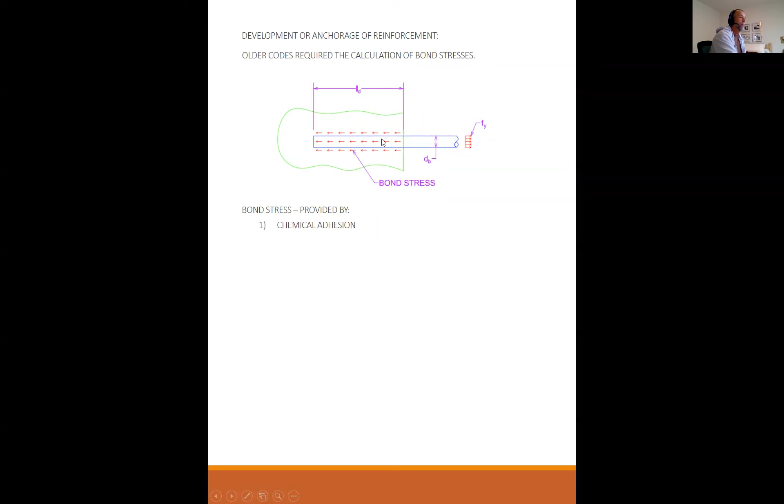The older codes checked this by calculating what the actual bond stress was at the interface between the steel and the concrete. We don't do that anymore. The bond stress is provided by, well, there really is a bond stress, we're just not going to try to calculate it anymore. It's just not reliable, but there is an actual bond stress. So what keeps this rebar from just pulling out of the concrete, so to speak? The bond stress is provided by these actions.

The first action is chemical adhesion. There's actually a chemical reaction between the concrete, the cement really, and the face of the steel that is sticky, and they bond to each other. If you've ever poured concrete up against steel, you know it takes a little banging to knock the concrete off. If there's any oil or form release on it, that makes it a lot easier, but concrete will stick to steel. If you've ever witnessed somebody leaving concrete in a mixing truck without cleaning it out, you actually have to get a guy inside with a jackhammer to knock all that concrete off.

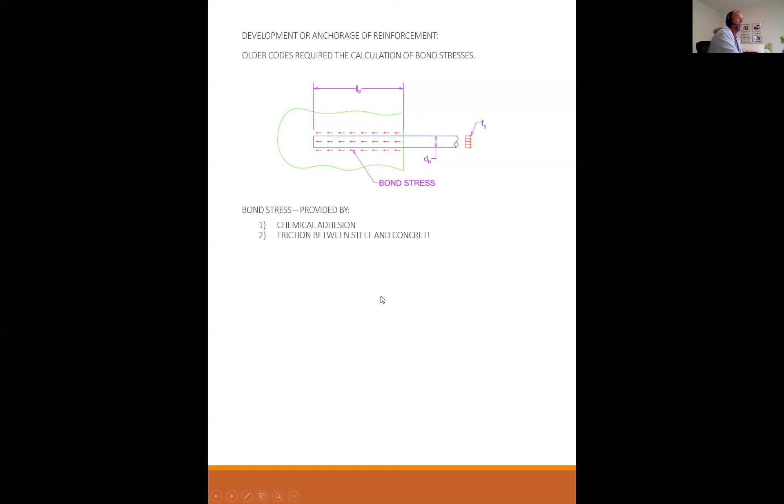It really does stick. You also get friction between the steel and the concrete, so as the steel is trying to pull out, there's friction between them. And lastly, you get bearing on the deformations. All rebar nowadays has little ribs on it. Those ribs are encased in concrete, and you'd actually have to crush the concrete between the ribs in order for the rebar to pull out. So these three actions are what lock that rebar into the concrete.

Bond stress is no longer computed because the test used to evaluate allowable bond stress put the surrounding concrete in compression. In a beam, the concrete surrounding the tension steel is not in compression. In other words, they used to hook up an apparatus, put a rebar in a chunk of concrete, put a testing ram on it, and pull to see how much development length it took to get it up to its yield strength. But the problem was they would lock the whole system together so the concrete was confined and couldn't split or crack. So it wasn't really a fair, true test, because in a real beam, the concrete can do whatever it wants, it can split and crack.

So instead of doing this, current practice is to focus on the development length, L sub D, instead of bond stress. Providing adequate development length ensures that F sub Y can be developed in the rebar without pull-out or splitting of the concrete. That's what the code is geared toward today: you plug in some parameters and it spits out what L sub D needs to be. Then it's our job to make sure that wherever the critical section is, the rebar extends at least L sub D beyond that critical section.

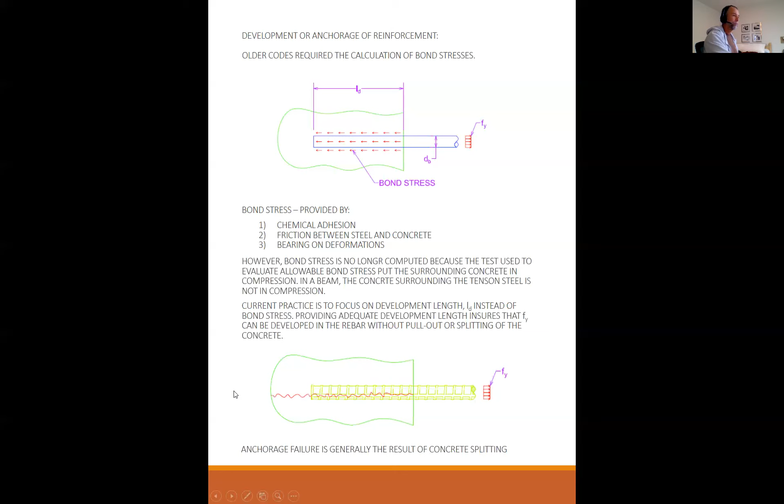Okay, so we have types of bond failures. What this is illustrating is around each one of these rebars is a cylinder of concrete. I mean, it's all concrete, but you can picture it like there's a cylinder of concrete surrounding this rebar, and that cylinder of concrete is in tension across the face of it because the rebar is trying to pry that concrete apart, so to speak.

So in a beam, if you have all these rebars trying to develop at the same time, it could actually split the beam right down through the center here. And once it splits that beam, you lose development on these rebars.

So we have this factor, C sub B, and C sub B is defined as 1/2 of the spacing to the nearest bar, less than the distance to the side or bottom face. So if I'm trying to develop this bar right here, then C sub B is the distance to the nearest face from the center of the bar, or 1/2 the space to the next bar.

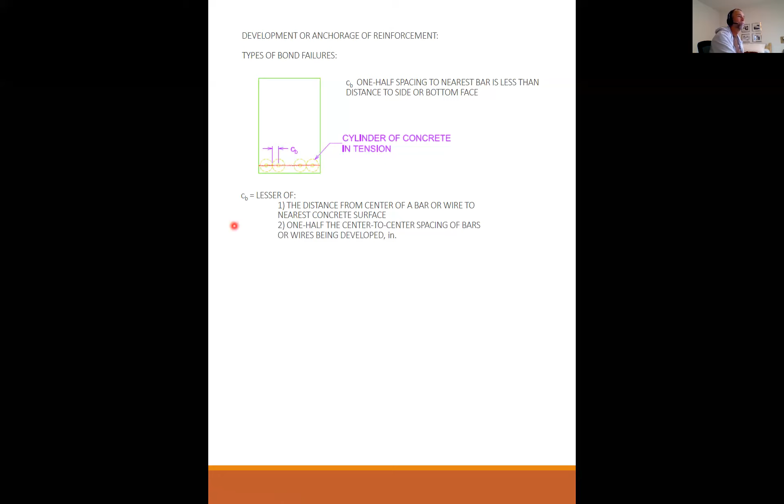Okay, so here we got bars on the corner. C sub B is measured from the center of the bar to the outside face or to the bottom face, whichever is the least.

C sub B: distance to the side face, less than the distance to the bottom, or 1/2 the spacing to the nearest bar. So this is really showing that if you have a concrete beam and you're developing these rebars, one of the failure modes could be that this rebar develops cracks going to the side or to the bottom or both. And once this cracks, it can widen that crack and separate a little bit.

And then you lose the chemical adhesion, you lose the friction. And at some point, you'll actually lose the bearing on the ribs of the rebar. And so you could prematurely fail a beam at a lower strength than you thought you would because you didn't consider this bond.

Actually, if you guys want, I will divulge an insider secret here. You can tell me if this helps or not, but okay.

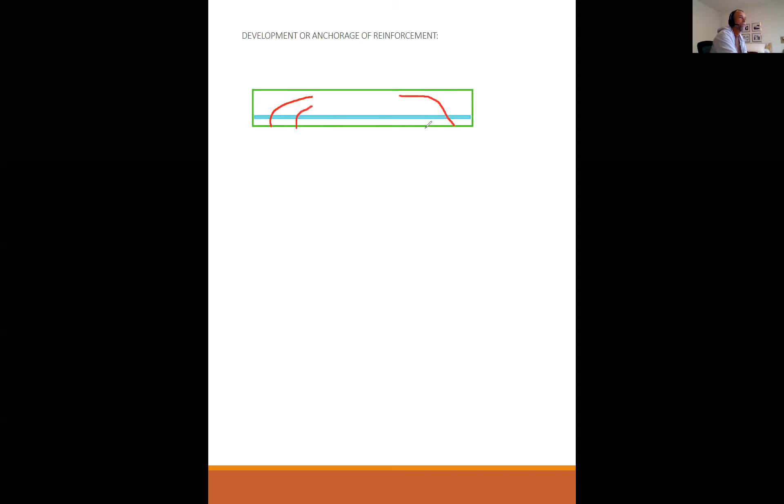Won't make this terribly long, but when I tested the beam with the number 5s, as I was testing them, I started getting some cracks that looked like this. And I was starting to get a little nervous. I was like, oh, look at that. Well, they're shear cracks. But I had number 3 ties in there, so I wasn't too terribly worried about shear cracks. That was part of my design.

But then, as I'm testing, and we're getting closer and closer to what the ultimate load should have been, the load that crushes the concrete here and yields the rebar here, we're getting closer and closer until I saw these cracks that went right like this, here and here. And no sooner did I see those cracks, the whole thing just collapsed. It instantly crushed up here, and these big wide cracks appeared here and here, and my beam failed.

I mean, literally, it was just 2 pieces of beam sitting on the bench. And it didn't get the final strength. I did not achieve the ultimate strength that this beam was supposed to achieve. Anybody want to take a guess why?

Was your placement of steel incorrect?

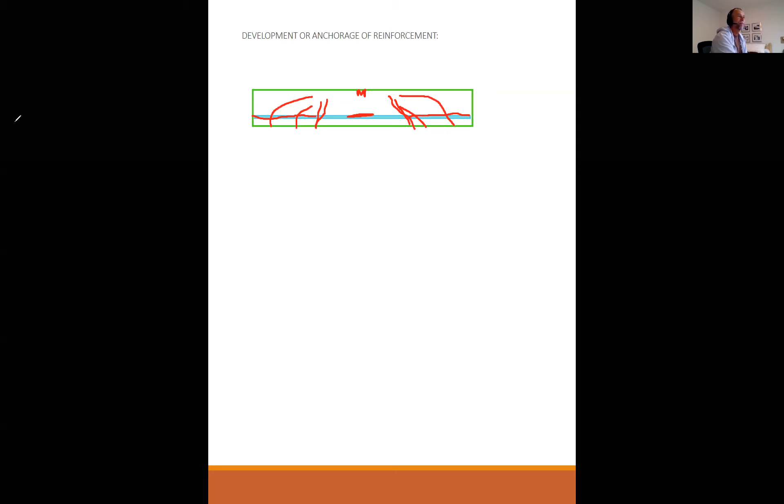I was saying, did it not bond with the concrete, right? It did not bond with the concrete, right? That's exactly right. So the point of maximum moment is right there at the midspan, but it still had, say, right here, a very large moment.

So I was getting a flexural crack, kind of like that. And it was still a very large moment. The problem was, which is why I brought up the story, the distance from the end of the rebar to this point of very large moment, not the maximum moment, but a very large moment, was insufficient. The whole beam was only 5 feet long. So that means from the midspan to here is 2.5 feet. That means this distance here was less than 2 feet, maybe 18 inches, 20 inches, something like that.

And when the stress in the rebar overcame the development ability of the concrete behind the rebar, it split right here and over here, and we had a bond failure. So the rebar never yielded. It got close. I back calculated to see what it was. I think I got something like 50-something KSI. So it got close, but it never developed the yield. So it failed in bond.

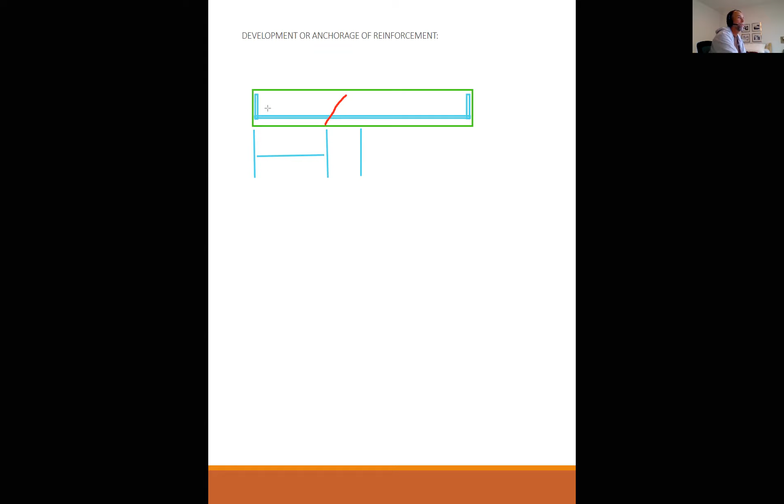And if I was to do this beam again, what I would do is put little tails on it like this. Because this distance was so small, it was insufficient to develop that bar to the point where I could develop the yield over here. So if I had put little hooks on it like this, then these hooks would grab the concrete better and I would have not had a bond failure.

So that was just a little story down nostalgic avenue about, yeah, this really happens. You really do have to think about this, because that would have been a catastrophic failure if this was actually something in service.

Professor, but isn't how the concrete's poured with the rebar, isn't that the construction engineer's job, not the one who's designing it?

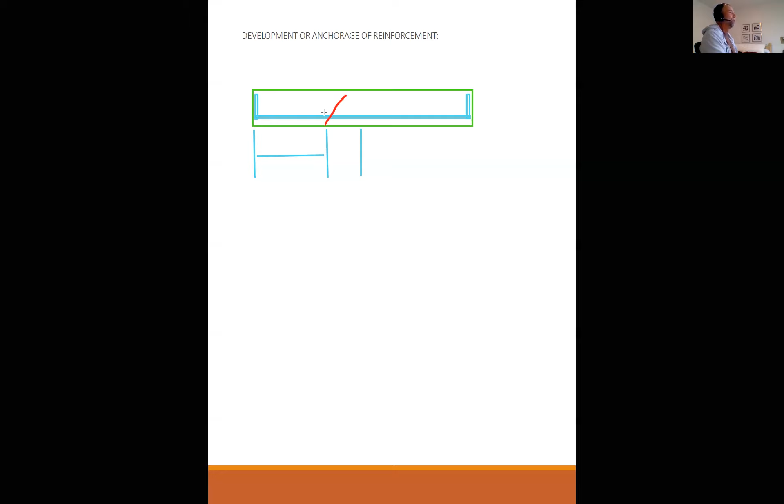No, it's not, but that's a good question. The design documents would show the beam like this. If I didn't show these tails on it, different people work with the contractor to draw up rebar shop drawings for different phases of construction. But if I don't show these hooks, the person drawing the rebar would just put a straight piece of rebar in there, so the concrete subcontractor wouldn't put these hooks in because that's what the design document shows. So if I want hooks on this, I have to draw hooks on it or call that out on the structural details.

Does that make sense? Yeah, but the hooks—you said they're only used if it's a short span, right? If it's short, or does it go for longer beams and girders too?

Well, let's get through this lecture—hopefully I'll answer that, because it's kind of a complicated thing. But suffice it to say that...

If your critical section—a critical section is just a section where, right here on this plane, I need to develop the yield of the rebar. That's all it means. This is just an arbitrary location on the beam, saying that right there where that red line is, I want that rebar to be able to develop its yield strength.

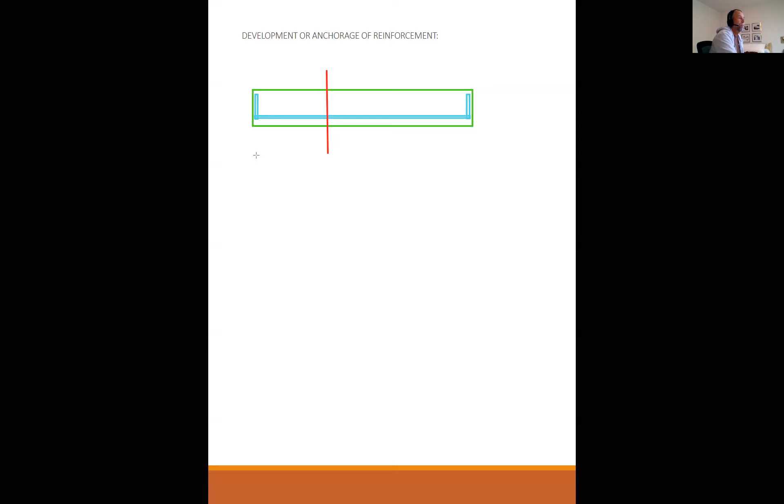If that's my critical section, it's my job as the engineer to be sure that on both sides of it, the rebar is fully developed. If it's not, I need to do something to make it fully developed. Hooks is one option, headed rebar is another, and even going with smaller bars is another option because they develop faster than big bars do. That's on me—the structural engineer is responsible to be sure the rebar is properly detailed at all locations within the scope of what you designed.

Makes sense, thank you. Okay.

All right, was nobody curious what happened to the fiberglass reinforced plastic? Did it fail before the rebar? Yeah, it did. Yeah, it was kind of obvious.

What about the bamboo? How did that do? Bamboo did really well. It did not carry the same load as the steel—the steel took something like 28,000 pounds to fail the beam, even though it was supposed to take over 30,000. I think the bamboo took like 18,000, but that's still pretty remarkable for bamboo. And it was very ductile—it developed cracks and failed slowly and deflected. It was really not a bad option.

The fiberglass reinforced plastic, on the other hand—the misconception I had as a student was that since this stuff doesn't yield until 120 to 140 KSI, it must be twice as strong. But what they don't tell you is that even though it may eventually be twice as strong, the modulus of elasticity of the material is only a third of what it is with steel. So as you're trying to develop this immense tensile capacity, it's straining like crazy—it's like reinforcing concrete with rubber bands. The concrete just cracked wide open and ultimately failed due to strain failure because the material kept stretching and stretching. It never got anywhere near 120 KSI. I back-calculated that the material was somewhere in the 30 to 40 KSI range when the concrete crushed. I was very disappointed.

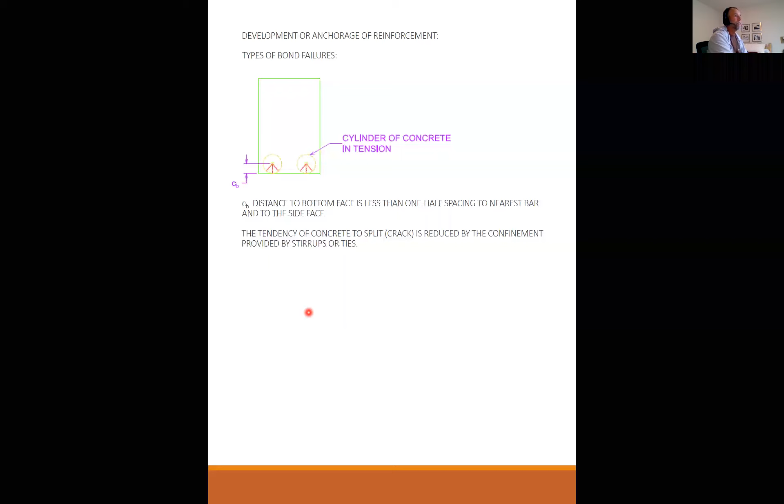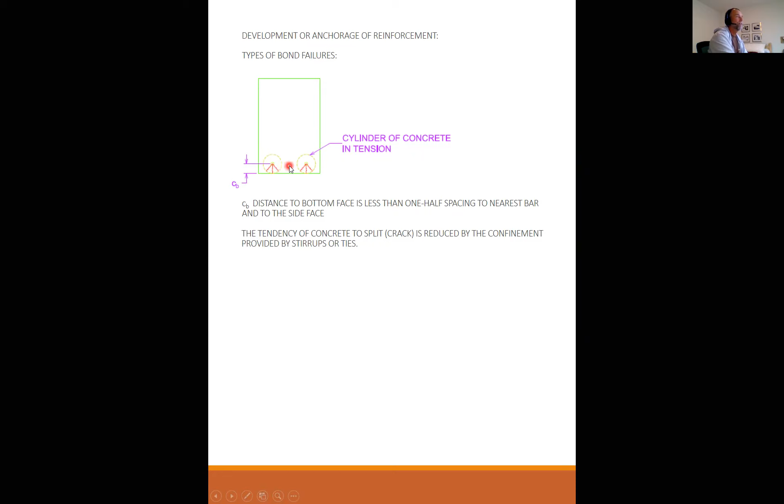So that's where we're transitioning to the next section. If it wants to crack along these faces, having a steel tie that wraps around this thing will tend to keep those cracks from developing. It'll still crack, but it'll keep them from opening up. So having ties around the steel you're trying to develop helps develop that steel. Here's the cracking plane from these rebars trying to develop, and this leg—we have two legs of steel crossing that plane.

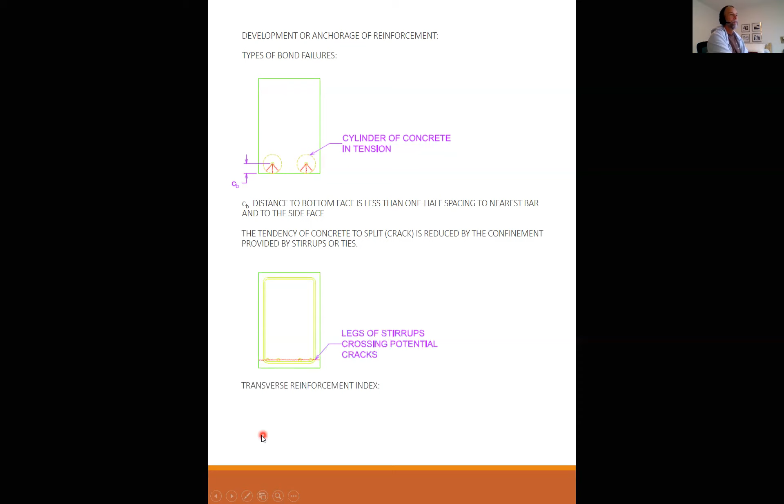So then we invent this thing called a transverse reinforcement index. Per ACI 318, section 25.4.2.3, we have the transverse reinforcing index, which is KTR, equal to 40 times the area of the transverse reinforcement

over S times N. This is not Saturday Night Live, this is not SN, this is S times N, where A sub TR is the total area of transverse steel. For U-bars and ties with 2 legs, use 2 times the area of the tie. S is the spacing in inches of the transverse steel, and N is the number of bars on the plane of splitting. If the main steel is in more than 1 layer, then N is the number of bars in 1 layer.

KTR may be taken as equal to 0 for simplicity if you like. It's certainly conservative. So there's a limit on the effect of spacing in transverse steel.

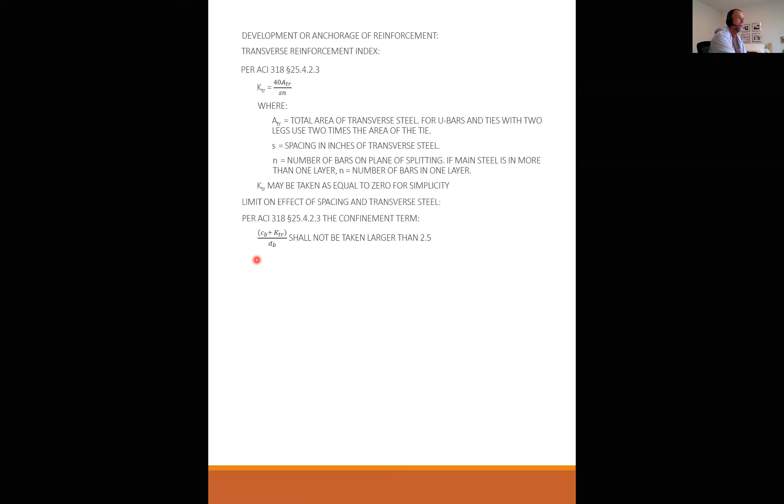Per ACI 318, section 25.4.2.3, the confinement term CB plus K sub TR over DB shall not be taken larger than 2.5. You'll see where this fits in a second, but the effect of the ties helping the development is limited. It kind of peters out after a while.

Okay, so now the development length per ACI 318, section 25.4.2.3. Here's the equation. So L sub D, the length required to develop the yield of the rebar, is equal to this whole thing here, where we have 3 over 40. We have Fy over lambda, remember our lightweight factor, times the square root of F prime C. We have these 3 modifiers, psi sub T, psi sub E, psi sub S.

We'll talk about those in a sec. And then here is your confinement term right down here. So you can calculate C sub B, you can calculate KTR over dB, but if this whole term is more than 2.5, then you're limited to just use 2.5. And then the last term here is D sub B, the actual diameter of the rebar that you're developing, which directly influences the length required.

Lambda is a lightweight factor from lecture 1, varies from 0.75 to 0.85 if you're lightweight, of course equals 1 if you're normal weight concrete.

Psi sub T is a casting position factor. It is equal to 1.3 if you have more than 12 inches of fresh concrete poured below the horizontal reinforcement. If your bars are vertical, this doesn't apply. But if you have horizontal bars, and when you're pouring the concrete, if there's more than 12 inches below the bar, then you have this 1.3 factor. Otherwise, it's equal to 1 for all other bars. And what is the point of this?

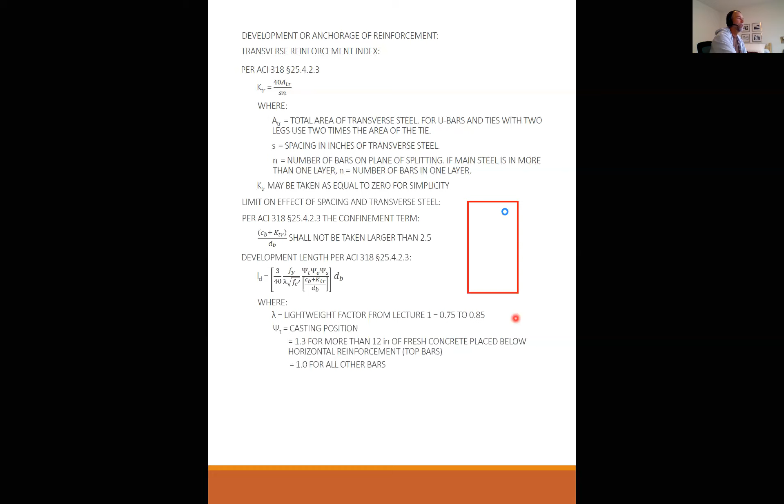Again, if your rebar is vertical, then this doesn't apply. This is only for horizontal bars.

Okay, psi sub E is for epoxy coated bars, where you have a factor of 1.5 for epoxy coated or zinc and epoxy dual-coated reinforcement with clear cover less than 3 dB or clear spacing less than 6 dB. It is equal to 1.2 if you have epoxy-coated or zinc and epoxy dual-coated reinforcement for all other conditions, and it's equal to 1 if you have uncoated or only zinc-coated reinforcement.

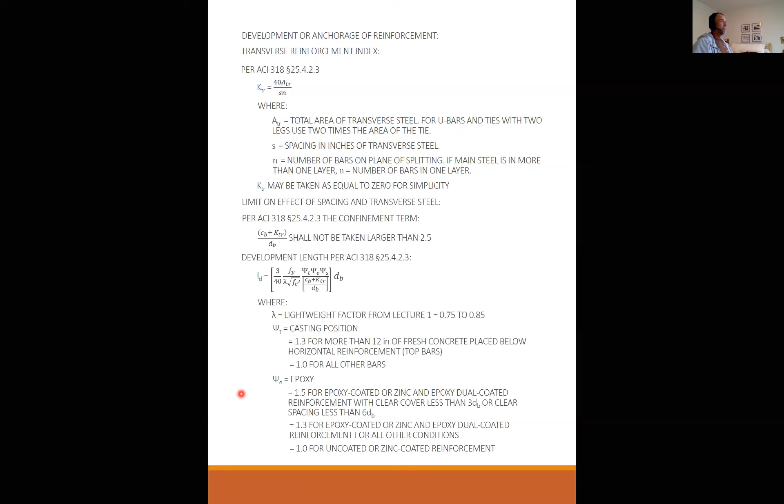So not very common will you run into epoxy-coated rebar. Let me put it this way. Not very common in my line of work means that I've seen it once. We did one job. In over 25 years, I've done one job where we had to provide epoxy-coated rebar.

Anybody want to guess where that one job, where that concrete was going? Was it submerged? Not quite. Good guess, though. Not quite submerged.

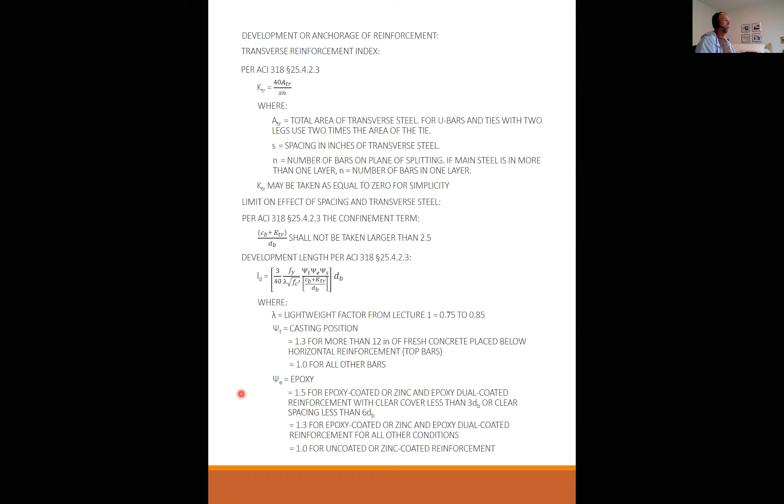It was actually a bridge that spanned from one side to the other side of a concrete containment vessel located at the Hyperion wastewater treatment plant. So this thing was inside of one of the poop ponds. And it was an environment that I don't think you even want to walk across that bridge, but it was a very caustic and corrosive environment. And Hyperion is LA County, so LA County Public Works made us put everything in that thing as epoxy coated. Otherwise, all the other thousands of jobs I've done were all uncoated rebar.

Okay, last one was psi sub S, which is a size factor. It's 1.0 for number 7 or larger bars, and 0.8 for number 6 and smaller bars and deformed wires. What they found is that bigger bars take more length to develop, and that's part of the dB factor in the equation, but it's kind of disproportionate. So they threw in this extra factor for bigger bars, and basically you get a little bit of a break for smaller bars.

So if you're having a problem with rebar development, one option is instead of, say, 3 number 11s, consider using 4 number 9s, or 5 or 6 number 8s. The smaller bar, you still get the same area because you use more bars, but they will develop faster than the bigger bars.

Per ACI section 25.4.1.4, the value of square root f prime c shall not exceed 100 psi. I've never really back calculated what that would need to be, but I think it's over 10,000... let's see, 10,000... oh okay, it is 10,000. So if you have concrete strengths over 10,000, you cannot use more than 100 psi for this term. They put a cap on it.

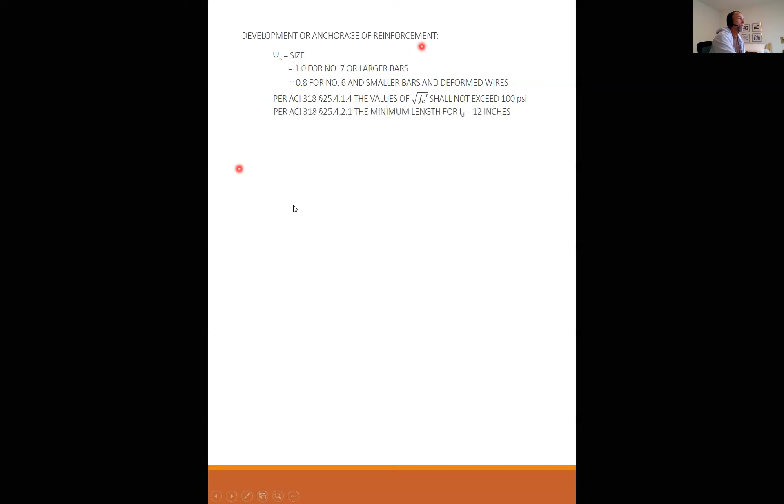Per ACI 318, section 25.4.2.1 - you can go to ACI chapter 25, and all of this stuff we're doing is in section 4. The minimum length for L sub D is 12 inches. So regardless of what the calcs say, you can't provide less than 12 inches. That's your minimum.

Okay, so example 1. If we're given 5,000 psi concrete, rebar is 60 ksi, and I have this cantilever situation where maybe this is a wall and I'm cantilevering this beam off of it. The question becomes, if I have 3 number 9s, how far back do I need to extend those number 9s into the concrete wall to be safe that when I load this, it will fully develop its yield before it yanks those bars right out of the wall? How far does that need to be?

Over here on the side, I've got some dimensional information. These bars are spaced at 7.5 inches apart, and they're 2.5 inches from the face, typical - that would be to the side or vertically. Concrete is normal weight, bars are uncoated. More than 12 inches of concrete will be poured below the bars - see, the bars are at the top here, so when they're pouring this, it's going to drop to the bottom more than 12 inches. So we do have a top bar situation. No transverse steel is provided in this case.

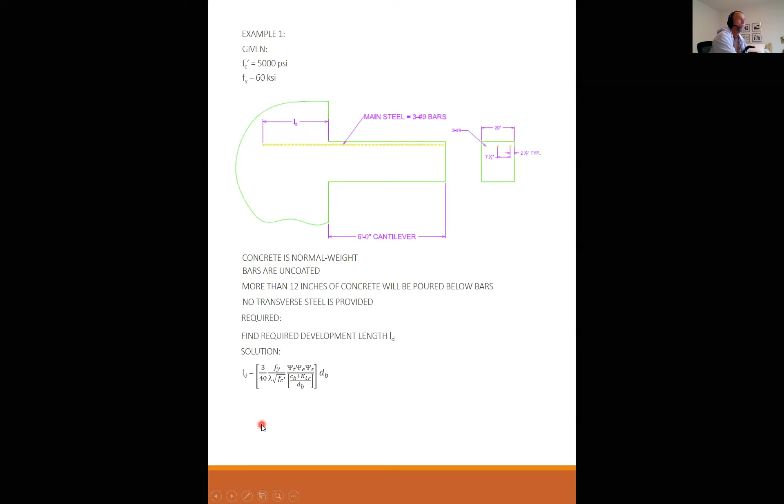Okay, so working through our solution, here's my equation. L sub D is equal to all of this, and I can start plugging in these values. Lambda is 1 for normal weight concrete. Psi sub T is 1.3 for top bars. Psi sub E is 1.0 for uncoated bars. Psi sub S is 1.0 for number 9 bars. C sub B is the smaller of half the spacing of the rebar, so 7.5 over 2 equals 3 3/4, or center of bar to the nearest face is 2.5 - 2.5 is going to control. K sub TR we're going to assume is equal to 0 because I have no transverse steel in this case. DB is 1.128 inches for a number 9 bar.

And by the way, as long as I've got most of you on the line here, looks like maybe 2/3 of you are on the phone right now - I want to be sure that nobody is still trying to calculate the area of rebar by using pi over 4 times the diameter squared. That may get you close, it may not get you close, but it's never the right answer. This is just kind of a pet peeve, but I was grading homework set number 7 - we've done 7 homeworks now, and some folks are still using pi over 4 d squared. Please do not do that. If you're not sure what the area of the rebar is, it's easy enough to look in your textbook and just look it up, okay?

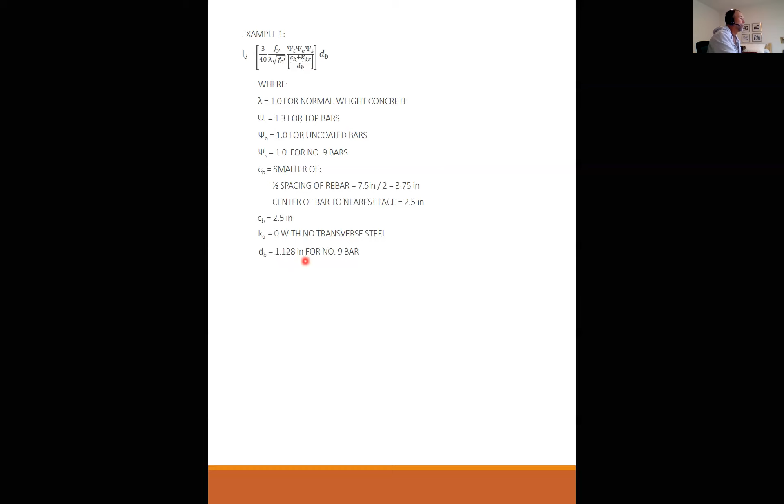Okay, very good. I know none of you did that, but somebody did, so just want to make sure that is clear. Your diameter must come from the table, your area of steel must come from the table. And just a point of note, that's what reminded me of that pet peeve: this is not 9/8. It's close, but it is not 9/8.

And the bigger the bar gets, the more it differs from just using its number in eighths as a diameter. Okay, enough of that. From the tables, the diameter of a number 9 bar is 1.128 inches. So I plug in all my values into this rather cumbersome equation. You can see the 1.128 goes here and here, and my total is 42.1 inches.

Oops, let me go back here. And you know what, I didn't check, but you should verify that this term right here is not greater than 2.5. Clearly 2.5 over 1.128 is less than 2.5, so I'm okay. But this is a point of note: please be sure that you check that your confinement term is not greater than 2.5.

So 42.1 inches. Before we get to example 2, I just want to make sure that we are clear that when I'm detailing this rebar, I must be clear on my drawings, in one way or another, doesn't matter how you do it, but you have to have at least 42 inches from the end of this bar to the critical face of this wall, and that has to be detailed on your drawings. Any questions about that?

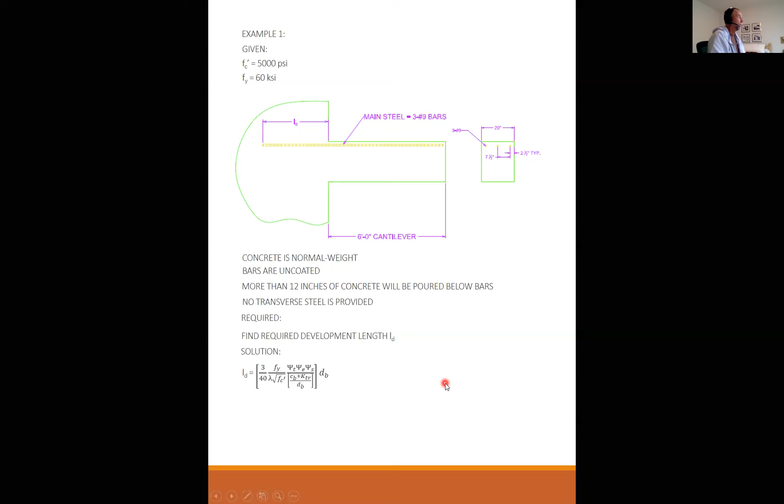Okay. So this is my drawing. It's not quite what you would see on a design drawing. A design drawing would have a better geometry, not just kind of a symbolism showing a bigger wall here. But what I'm saying is on your drawings, it would look a lot like this. You'd say, you know, this is the dimension of the cantilever. You'd have some dimensions on the section.

You'd call out your 3 number 9 bars. But you have to be very careful in a situation like this that you define the minimum length from the end of the bar to the face of that wall, so that a detailer or rebar provider doesn't just assume, all right, I'll just make this 3 feet, that should be good. 3 feet is not good, it's not good enough. You need 42 inches. So you, as the engineer, have to define this and put a dimension on it and say 42 inches minimum.

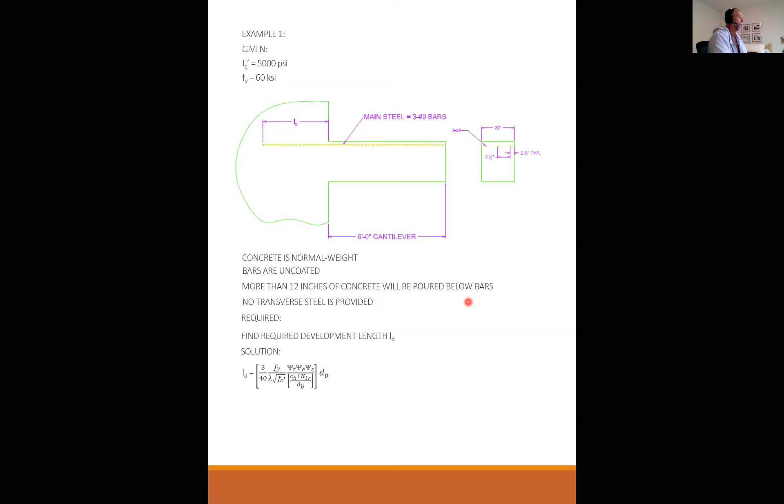The green line is the wall, yes, or the green line is the concrete. Okay, does that make sense to everybody? Okay. So for the number 9 bars, we're looking for 42.1 inches minimum.

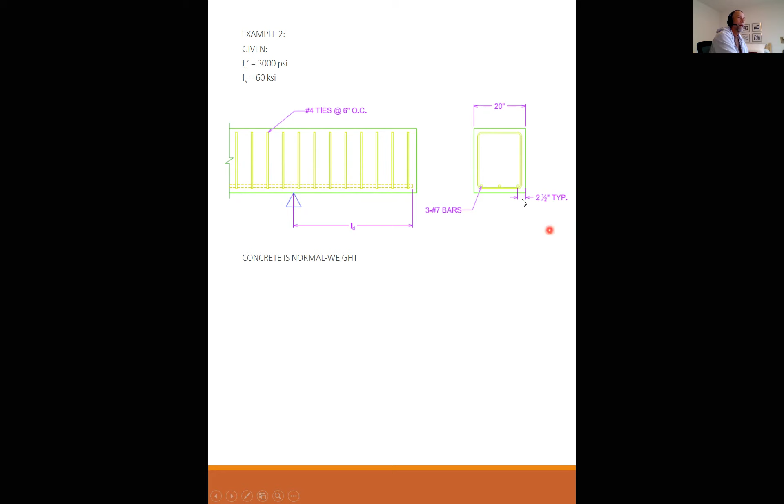So this is where I want to fully develop my rebar. How much more does it need in order to be fully developed at this point? That's what we're looking for. The rebars are 3 number 7s this time. I have 2.5 inches typical from the bar to the face. And with 20 inches, you could calculate what that spacing is in between there as well. And I do have transverse reinforcement: I have number 4s at 6 inches on center.

And you can see from the section that I have 2 legs of the number 4 tie. Concrete is normal weight, the bars are uncoated. And as you can see from the illustration, there will be less than 12 inches of concrete poured below the bars. Transverse steel is provided, required. What is the development length L sub D required to guarantee yielding at this point?

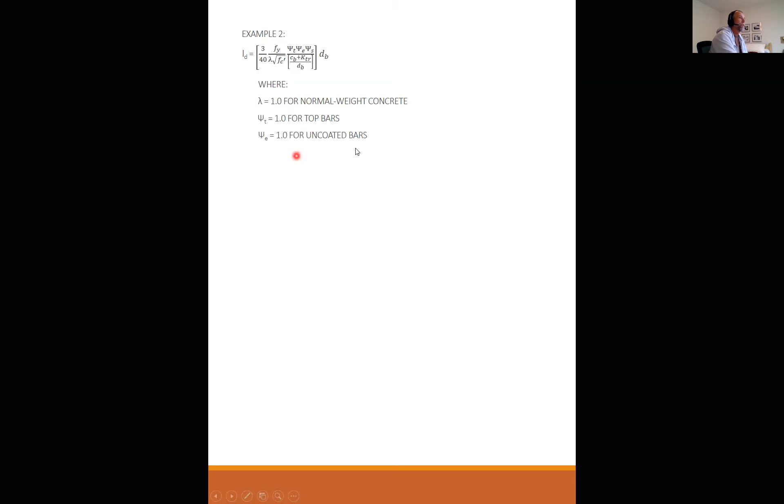Solution, here's my equation, where lambda again is 1.0 for normal weight concrete. Psi sub t is 1.0 for bar position, psi e is 1.0 for uncoated bars, and psi sub s is 1.0 for number 7 bars or larger.

C sub b is the smaller of half the spacing of the rebar, so that's 7.5 over 2 is 3 3/4, again, or the center of bar to the nearest face is 2.5 inches. C sub b then is the lesser, so 2.5 inches controls.

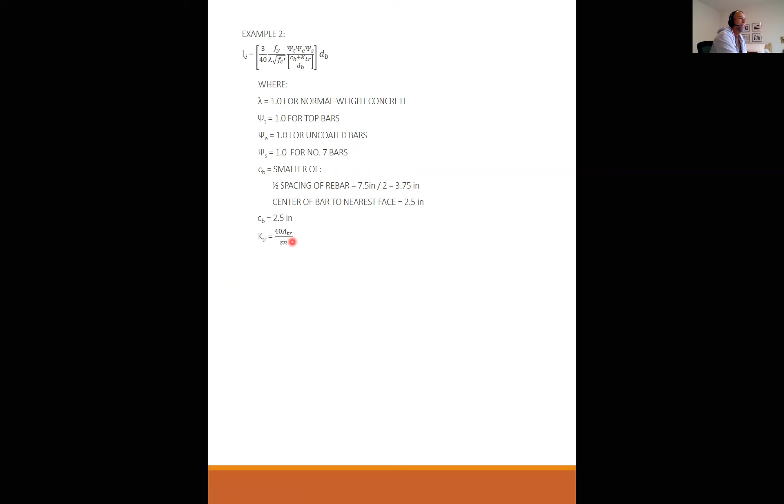So my reinforcing index, my confinement index, K sub tr, is 40 ATR over SN. ATR is 2 legs of number 4 bar, 0.40. S is 6 inches on center. And N, I have 3 bars. Let's go back and look at that. I am trying to develop 3 number 7s in one plane. So if developing these bars tries to split this plane, I've got 3 of them within that plane. So N is 3.

N is equal to 3. So K sub TR is 40 times 0.4 over 6 times 3, equals 0.89 inches. Therefore, CB plus KTR over DB is 2.5 plus 0.89 over 0.875, equal to 3.87. That's greater than 2.5, so you have to cap it at 2.5.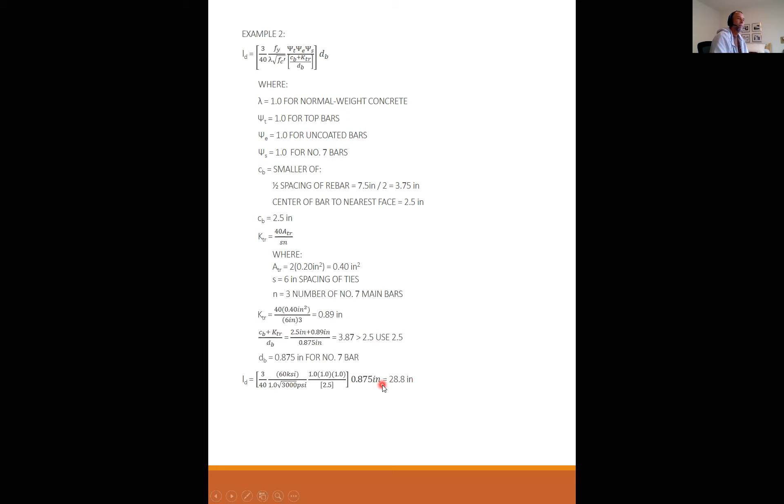dB is 0.875 for a number 7 bar. So I plug in all my values, my yield, my concrete, my lambda, psi t, psi e, psi s, my 2.5 times 0.875 dB, and I get 28.8 inches. That's the minimum distance to develop those number 7s.

Okay, do I have any questions about developing straight bar?

So as I mentioned earlier, if you don't have enough room, an option is to hook your rebar so that it grabs the concrete quicker and you don't need as much development length. So the development of hooked reinforcement to reduce the required distance to develop reinforcing hooks may be used.

Here's an example. So if this is my critical plane, then we define L sub DH. L sub D is for straight bar, LDH is for hooked bar. The distance is from the critical section to the back of the hook. And then the code defines the minimum hook length as 12 times the diameter of the bar.

And then we have this minimum radius here. When you bend the rebar, this radius is a function of the bar diameter. So the bigger the bar diameter, the bigger this radius has to be, so you basically don't break or fracture the bar when you're bending it.

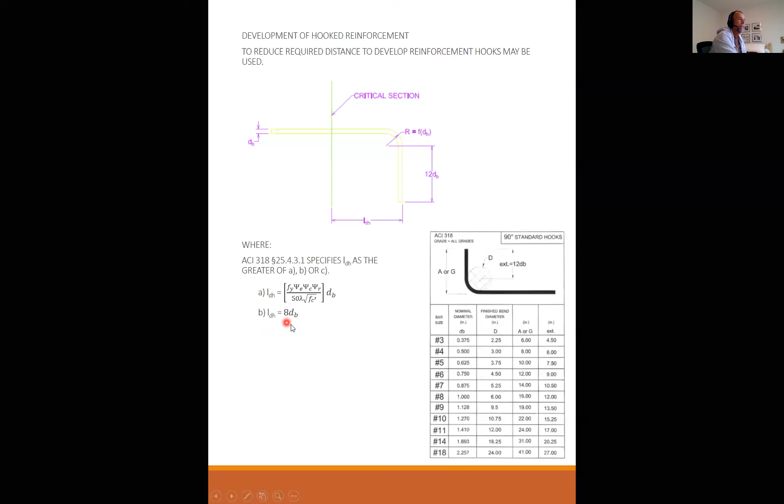Okay, so ACI 318, section 25.4.3.1 specifies LDH as the greater of A, B, or C. A is an equation that looks a lot like the straight bar equation, just a little simpler. B is 8 times the bar diameter, much simpler. And C is just a flat out 6 inches - this can never be less than 6 inches for any size bar.

Lambda, the lightweight factor from lecture 1, 0.75 to 0.85 for lightweight, goes here. Psi E is your epoxy factor, but be careful - it's actually different here, not the same values as for straight bar. For hooked bars, it's 1.2 for epoxy coated or zinc and epoxy dual coated reinforcement, and 1.0 for uncoated or zinc coated reinforcement. The other one had 1.5 and different values, so Psi E is not the same from straight bar to hook bar.

Psi C is the cover factor, and it's equal to 0.7 for number 11 and smaller hooks with a side cover, normal to the plane of the hook, greater than 2.5 inches, and for a 90-degree hook with cover on the bar extension beyond the hook, greater than 2 inches.

So in this illustration, that means from the back here to the face is at least 2 inches, and from the side plane to a face of concrete, going in and out of the page, at least 2.5 inches. Almost always the case, and then you get the 0.7.

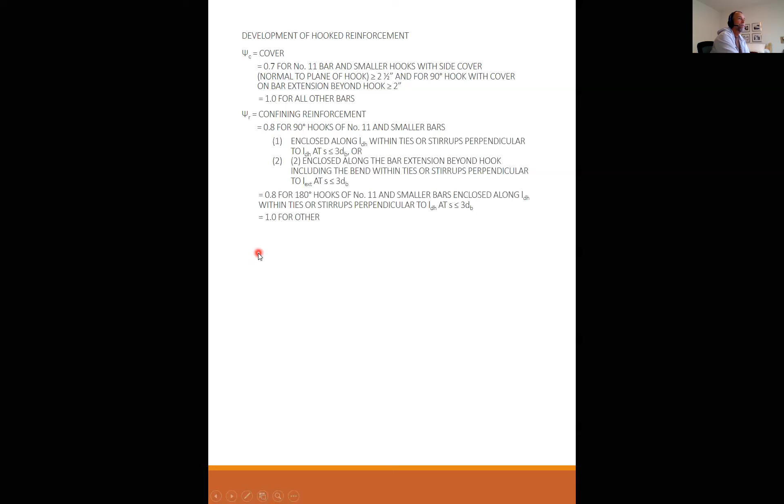Any questions on this? Professor, where does the 2 dB play?

Good question. That just means that the first tie has to be very close to the end of the bar, very close to the top of the bar. So you can't have this big old hook and then just put a bunch of ties way down here. That's ineffective. It has to be close to the top.

Okay, makes sense. Thank you.

ACI 318 section 25.4.3.3: if both side cover and end cover are less than 2.5 inches, then A through C will apply, where the hook shall be enclosed along LDH within ties or stirrups perpendicular to LDH at spacing less than 3 dB. The first tie or stirrup shall enclose the bent portion within 2 dB. And psi R shall be taken as 1 in calculating LDH in accordance with that equation.

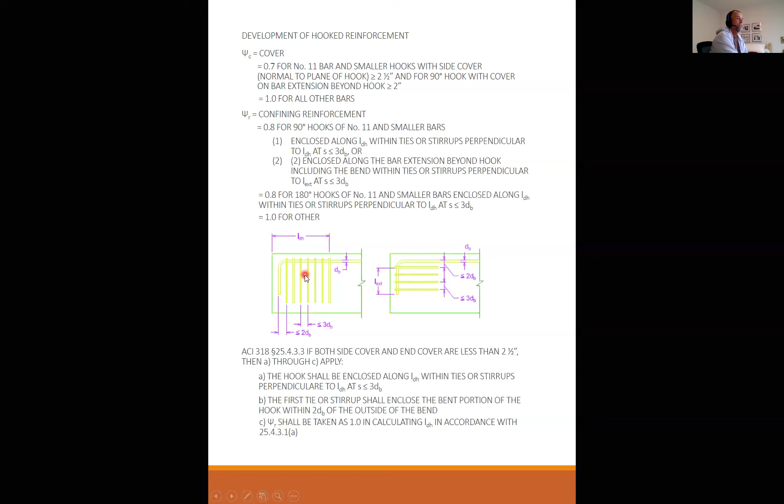ACI 318 table 25.3.1 gives the straight extension of the hook as a minimum of 12 dB.

ACI 318 sections 25.4.10.1 and 25.4.10.2 allow a reduction of development length of straight, hooked, or headed reinforcement, which we haven't talked about yet, but not less than the applicable minimums, for excess reinforcement. If you have more rebar than you actually need, then you can take a little reduction in the development length to account for having more steel than you actually need.

So LD, LDH, or LDT, which we haven't talked about yet, can be reduced by a factor of AS required over AS provided, unless you're at non-continuous supports, at locations where the anchorage or development for FY is required, or where bars are required to be continuous.

And for headed or mechanically anchored deformed reinforcement, and in seismic force resisting systems and structures assigned to seismic design categories D, E, or F — in other words, if you designed this as a moment frame in a seismic resisting frame, then you can't take this reduction.

Okay, let's do example 3, then we'll take a quick break.

Example 3: concrete is 4,000 PSI, yield is 60 KSI. Here is our old friend, the cantilevered beam off of a wall trick, but now I want to develop this with a hook instead of a straight bar. I have my 3 number 9s, here's my spacing, the same as before. I want to calculate the minimum length from the critical section to the end of the bar.

And again, I want to make sure everybody is clear that if I put a big heavy weight out here, the thing is going to try to fail right along that face, so that's my critical section.

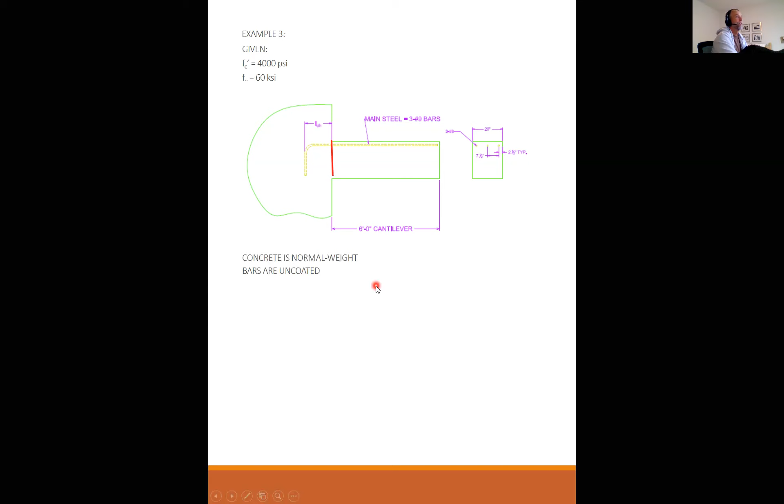Concrete is normal weight, the bars are uncoated, the back cover and the side cover are greater than 2 inches. Transverse reinforcement does not meet the requirements for confining reinforcement — so I may have transverse reinforcement in here, but it doesn't meet that 3 dB requirement. What is the required development length LDH?

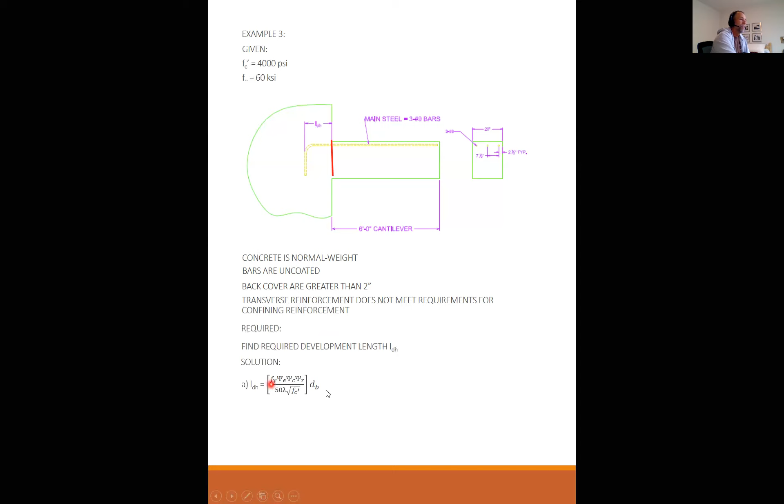Solution: it's either A, B, or C. A is the equation where lambda is 1, psi sub E is 1 for non-coated bars, psi sub C is 0.7 for cover and 1.0 for unconfined bars, D is 1.128 for a number 9 bar. I plug those into the equation and get 14.98 inches, or 15 inches. B is 8 times dB, which is 9 inches, or C is 6 inches. So clearly from A, B, or C, A controls at 15 inches.

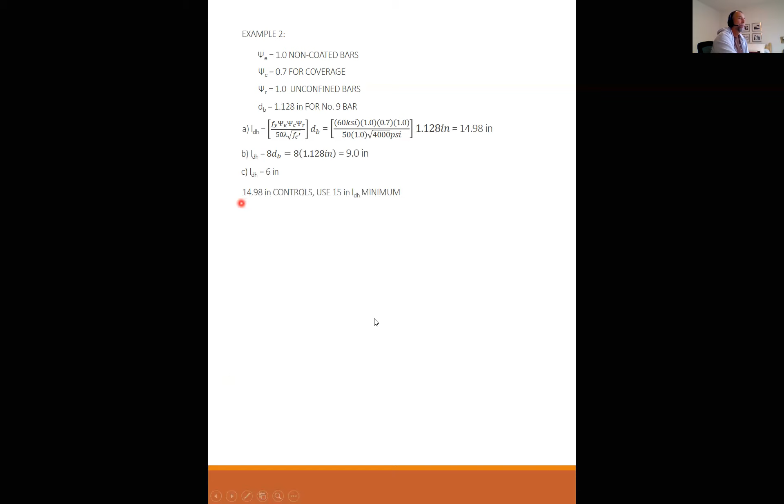Okay, any questions on hooked reinforcement?

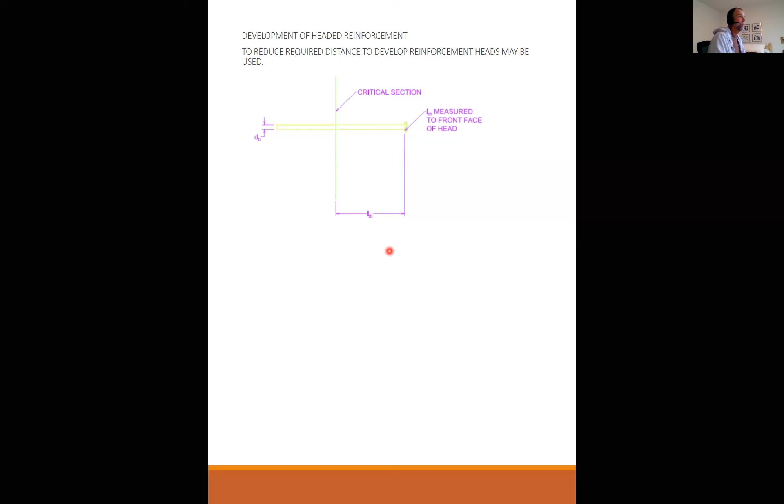So there's usually a lot more room to run rebar out of the beam into the column and so on and so forth. So this is a detail used a lot more in the precast industry, I would think, than in the cast-in-place.

Okay, so ACI 318 section 25.4.4.1 specifies that heads can be used when all of the following conditions are met. The bar shall conform to 20.2.1.3, which is ASTM specifications for A615, A706, or A995 rebar.

The bar yield shall not exceed 60 KSI. The bar size shall not exceed number 11 bars, and this is just due to limited testing data that they have.

The net bearing area of the head shall be at least 4 times the area of the bar. So the net area of the head is the underside of the head minus the bar itself. So this is the actual area, in square inches of steel, bearing up against the concrete that keeps the bar from pulling out.

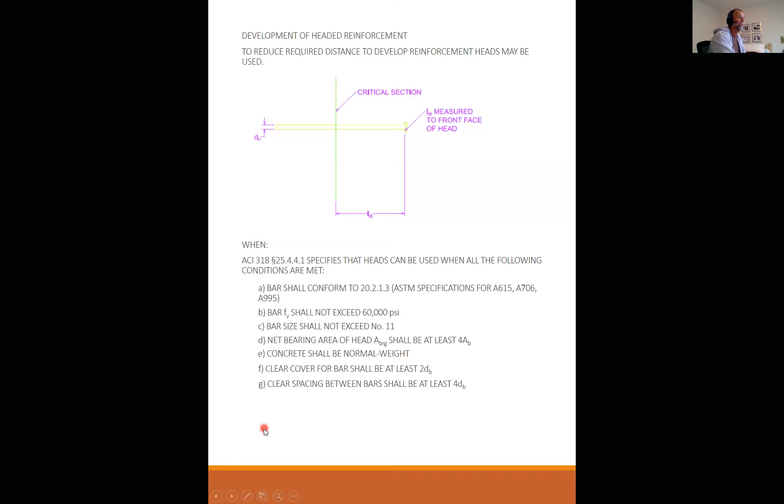Concrete shall be normal weight. The clear cover from the bar shall be at least 2 diameters - that could be to the side or to any side really. And clear spacing between bars shall be at least 4 dB from this bar to the next bar.

ACI 318 section 25.4.4.2 specifies LDT as the greater of A, B, or C, where A is the equation form, LDT... that's supposed to be LDT here. LDT is equal to 8 dB, or LDT is equal to 6 inches.

Psi E is your epoxy factor, that's the only factor left in this equation. It's 1.2 for epoxy coated or zinc and epoxy dual coated reinforcement, and 1.0 for uncoated or zinc coated reinforcement.

F prime C in this equation shall not exceed 6,000 PSI concrete. It's kind of interesting, so they put a much tighter restriction on this term here.

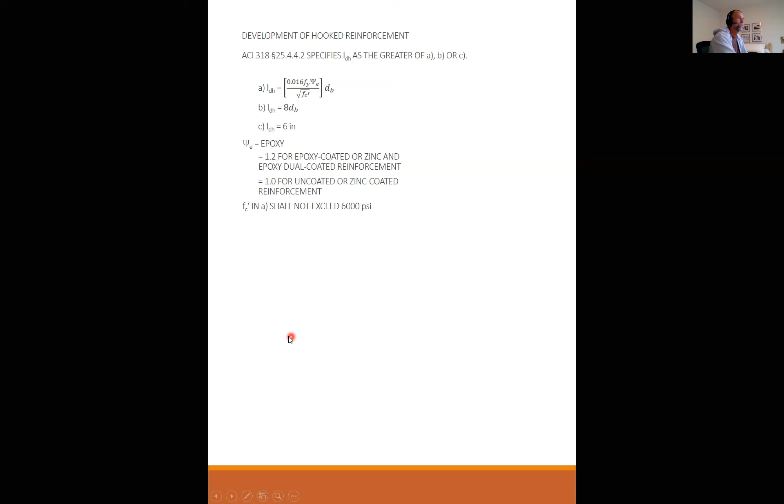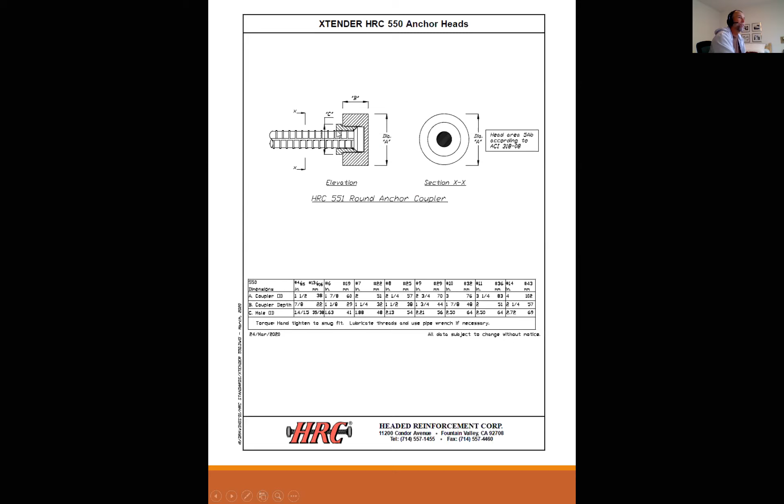This is a different type. This is where you have - okay, this threads onto this piece here. So this is a solid steel piece that threads onto the rebar piece - male and female pieces.

Okay, any questions on headed rebar?

Okay, so the next topic is development of welded wire fabric in tension.

So here we have our critical section, and we have a welded wire. This is going to be a deformed wire. Welded wire comes in two main styles, either plain or deformed. They're both made out of wire.

What's the difference between wire and rebar? Rebar is rolled from raw material. It's melted in a giant cauldron, then formed into ingots, and they take the ingots to the other side of the facility. They melt those ingots down into liquid steel, pour the liquid steel into a continuous rolling process, like a giant wheel with the shape of a rebar formed into it, and it rolls that out, and at specified lengths—20, 40, 60 feet—they snip it off, and then you have a piece of rolled rebar.

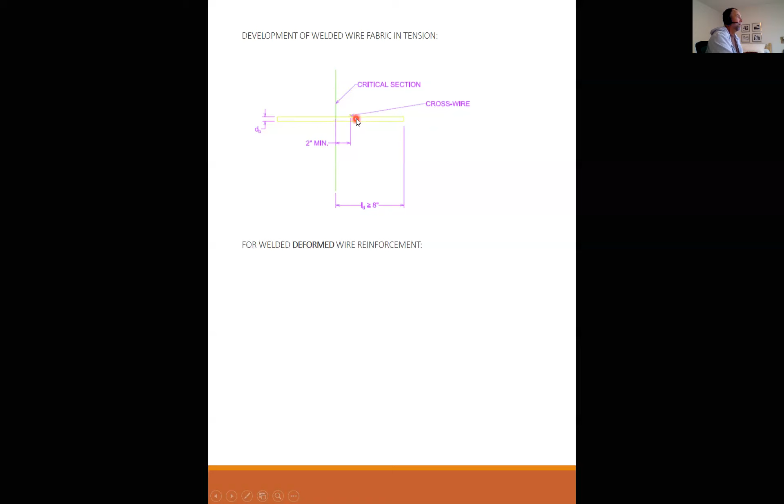So, if the welded wire is deformed, you have to have a cross wire, and that cross wire has to be at least 2 inches from your critical face. Then you have to have a tail beyond that cross wire equal to LD. ACI 318 section 25.4.6.2 specifies that LD is found from ACI 318 25.4.2.2 or 25.4.2.3, which is the equation we covered at the very beginning of this presentation, multiplied by a wire factor psi sub w found from 25.4.6.3 or 25.4.6.4. In other words, you treat this like a piece of rebar, but you have to multiply it by this psi w for wire.

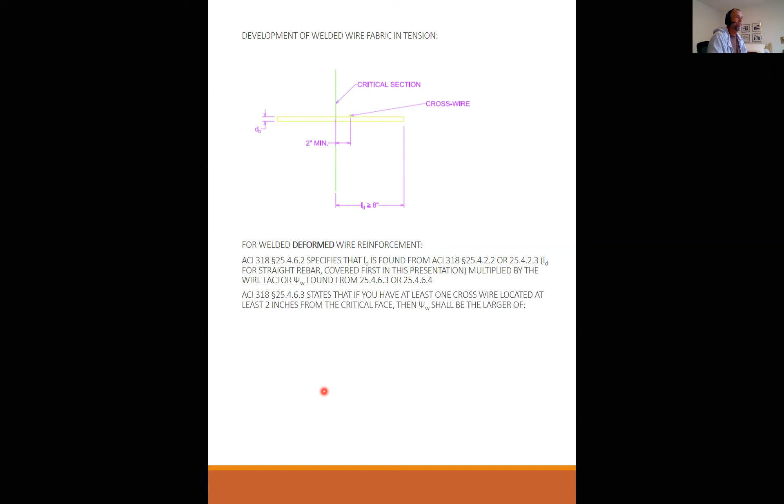ACI 25.4.6.3 states that if you have at least one cross wire located at least 2 inches from the critical face, then psi sub w shall be the larger of Fy minus 35,000 over Fy, or 5 dB over S, the spacing, where S is the spacing of the wires being developed. ACI section 25.4.6.4 states that if there are no cross wires, then psi W equals 1, and you basically treat it like a piece of rebar. ACI section 25.4.6.2 allows for epoxy-coated rebar that psi E equals 1.0.

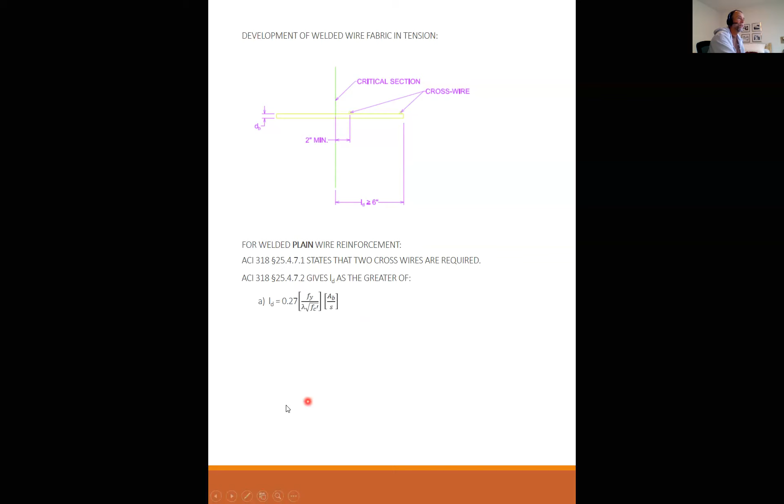Okay, now let's move to plain wire. The deformed wire needed 1 cross wire. Plain wire reinforcement needs 2 cross wires, the first one being at least 2 inches from the face. ACI 318 section 25.4.7.1 states that 2 cross wires are required, and LD is the greater of this equation here, or LD is the spacing of the cross wires plus 2 inches, whichever is greater. So if the space between the 2 wires is 6 inches, then this needs to be at least 8 inches, where S is the spacing of the wires being developed.

Okay, any questions? I know I went through that kind of quickly. It's kind of a niche market—you may or may not even see this in a concrete career, but just so you know it's there, welded wire mesh is treated separately from just plain good old rebar. Any questions on that?

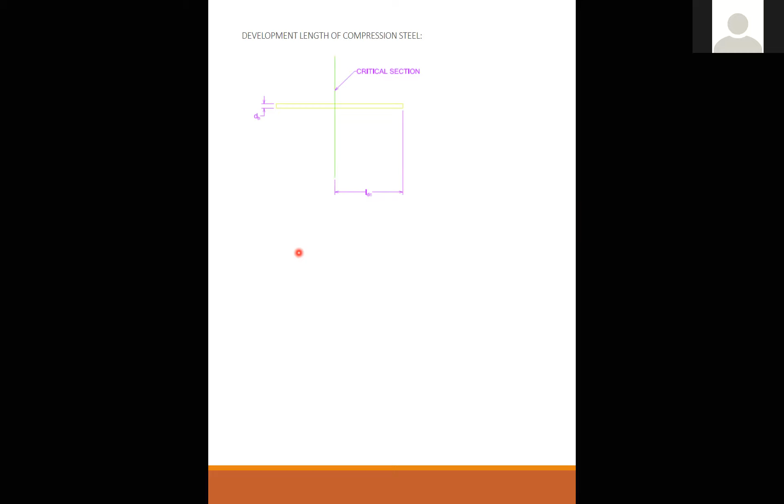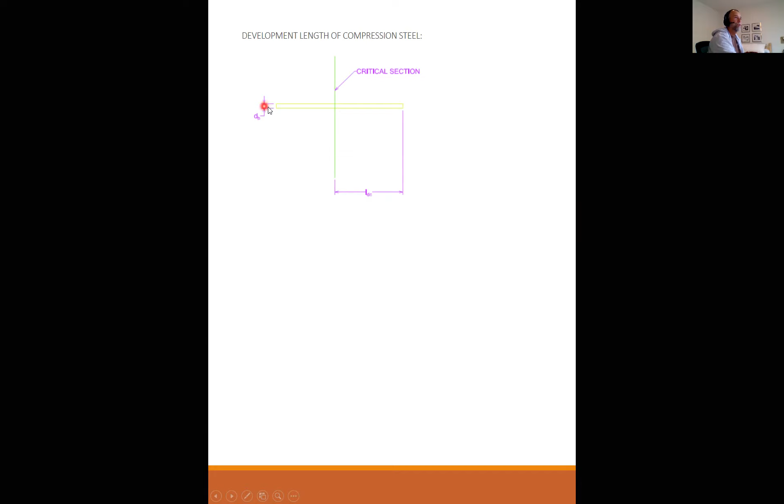Okay, let's talk about compression steel. So here again, I have a critical section, and I need to know how much rebar does it take into my critical section to develop the full yield of that rebar, but in compression, not tension. What do you think? Should it be less or more if it's in compression? Probably less, right? It is less. It takes less because you have this bearing at the end here. So in order to fail by pushing the rebar into the concrete, you basically have to crush the concrete right on the tip, kind of like driving a spike into this thing.

For deformed reinforcing bars and deformed wire in compression, ACI section 25.4.9.2 gives LDC as the greater of this equation here or this equation here. Whichever of these two is greater, that's the one you have to provide, or minimum 8 inches.

In this equation here, you have your lambda, the lightweight factor, and you have psi sub r, your confining reinforcement factor. If you're putting this in compression, you tend to be splitting the whole section, and if it's tied together with confining reinforcement, you get a better value.

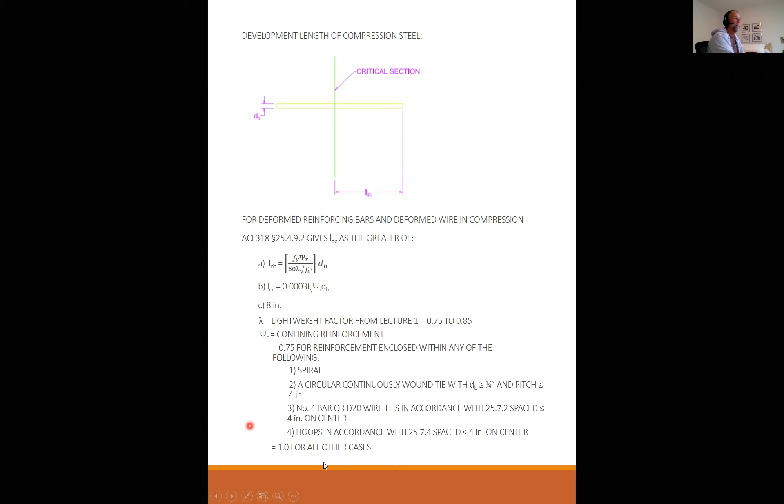Confining reinforcement psi sub r is 0.75 for reinforcement enclosed with any of the following: a spiral, a circular continuously wound tie with dB greater than 1/4 inch and a pitch less than 4 inches, or number 4 bar or D20 wire ties in accordance with 25.7.2, spaced at less than 4 inches on center, or hoops in accordance with 25.7.4, spaced at less than 4 inches on center. And if you don't have that much confinement, then you just use 1.0 for any other case.

Okay, that was it for compression steel. Any questions? Where would you expect to see something like that, you think? Where might that come up?

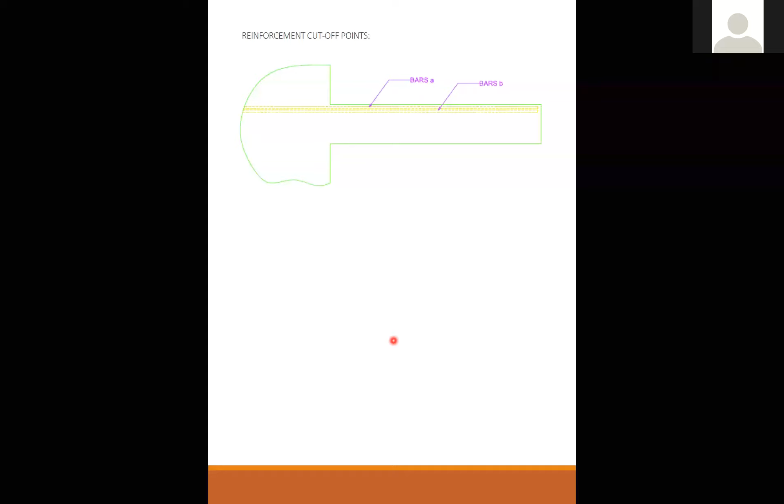Well, yeah, cantilever beam? Possibly, yeah, cantilever beam on the bottom of the beam where you're in compression. Yes, that would be one place.

I'm thinking where it comes up probably most commonly, and I'll draw a little diagram here, is if you have a concrete footing, and on top of this concrete footing, you have a concrete column. If you don't have a lot of moment, but you have a lot of axial load on that column, then you could have these rebars going into the foundation. And you better be sure that you have enough development from the bottom of the column to the bottom of the rebar to develop that rebar in compression if the load is pushing down this whole thing in compression.

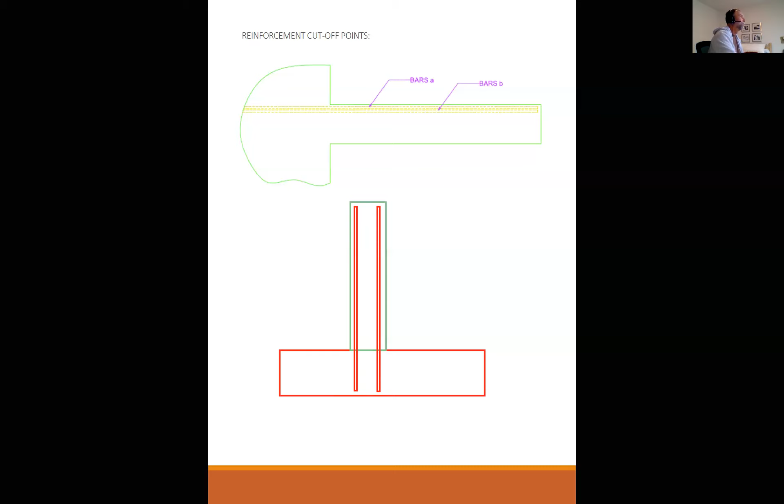If you don't have enough room, then what could happen is either the bars could crush the concrete and slip into the foundation, or if it's like how I've drawn here, you could actually punch these bars right through the bottom of the foundation. Neither of those are very good. So that's where that would come in. That's where, as a designer, you've got to make sure that you've checked this, that you have enough room in here to develop those bars.

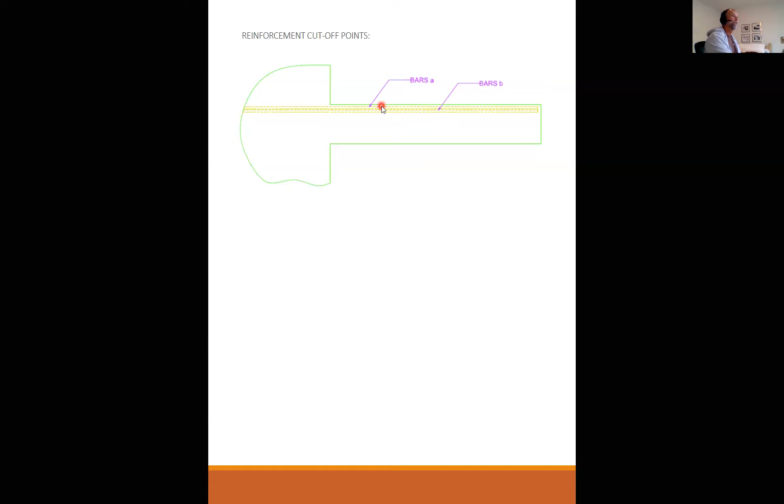Okay, do I have any other questions before we move on? Now what we're going to talk about is reinforcement cutoff points. So here I've got a cantilever beam, and I've got two rows of steel: these bars A at the top, and these bars B just below them.

So that's the idea of reinforcement cutoff points, it's for economy. You don't always have to take the steel that you need right at the maximum; you don't have to carry it all the way through all the time. The other thing, remember this came up, is when we're looking at one-way slabs. You need some steel in the top for the negative moment, and some steel in the bottom for the positive moment. But you don't need to carry that steel all the way through the whole span. There, you can cut it off as you don't need it anymore. So that's the idea of calculating reinforcement cutoff points.

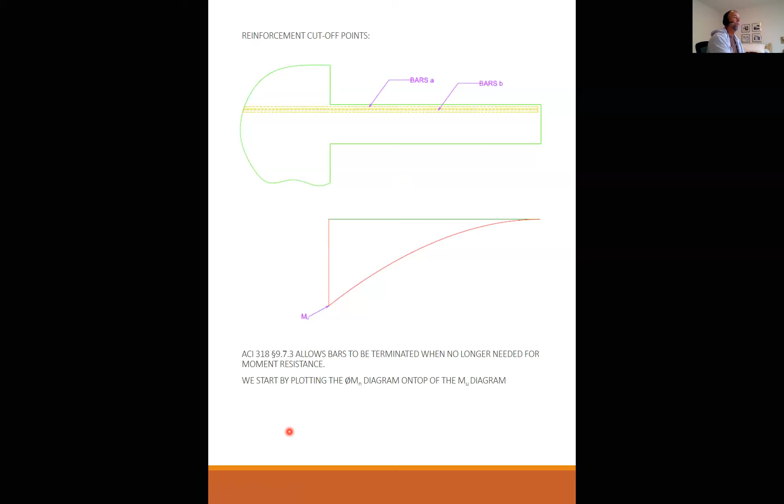ACI 318, section 9.7.3, allows bars to be terminated when they are no longer needed for moment resistance. We start by plotting the phi-mn diagram on top of the mu diagram, like so. This is mu, which is what you would calculate from your mechanics of materials class.

This is the phi-mn diagram, showing the capacity of bars A and B. All the bars develop a moment capacity down to here. Why is this beveled like this? Why doesn't it go right to the end of the beam?

Anybody? Because of that little edge that doesn't have steel. Pretty close, because right at the end of the beam, you have no steel. That's absolutely true. But just a hair inside of the beam, you have steel right there. But that steel has almost no development length. The straight portion of steel beyond this point is nothing, so with no development length, you have no capacity.

And as you move along, you start building up development length, but it takes this distance here to get to full development length. So that's what we were just talking about, L sub d, the development length. It takes this much room to fully develop that rebar to the yield.

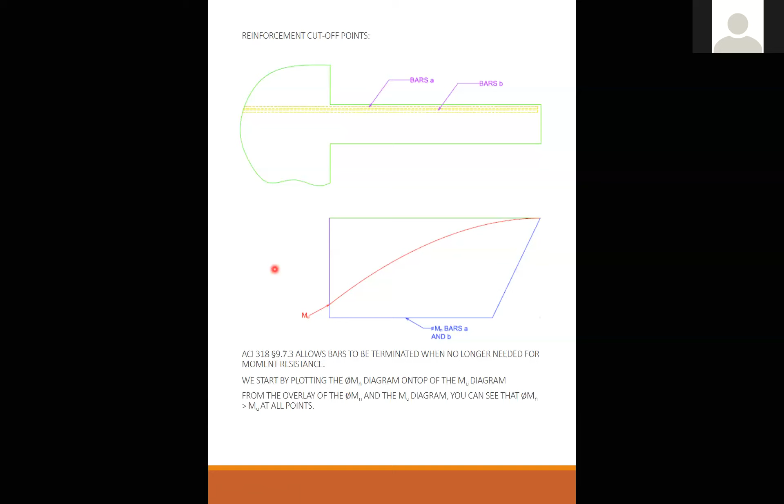Okay, does that make sense to everybody? Is everybody tracking with what I'm trying to do? Is anybody tracking with what I'm trying to do? Yes, Professor. All right, as long as I got one person still alive. All right, okay, more than one person.

Great, all right, so as I was showing, this is L sub d, the length it takes to develop these bars. At the termination of bars A and B, we have a linear progression of strength as the bars are developing within the L sub d length. Once you get to L sub d, you have your full capacity based on the yield of the bar.

For most of the span, phi-mn is much larger than needed. Therefore, some bars can be terminated early. Not all the bars, of course, because then you have no capacity, but you could take some of these bars and just stop them early.

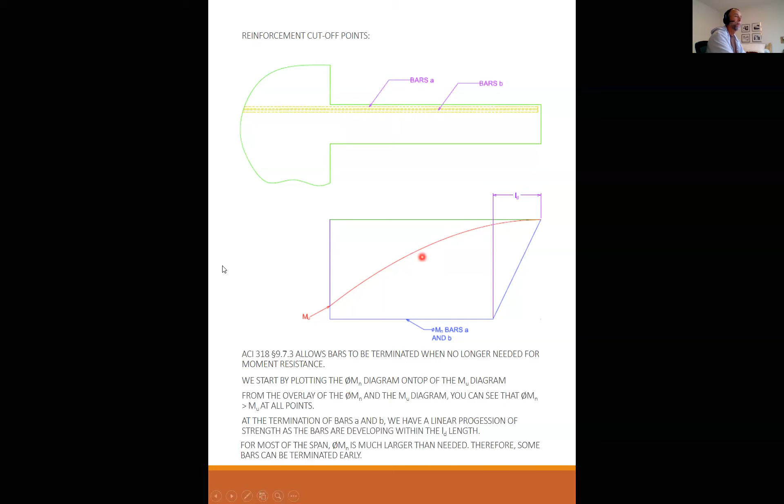Okay, so what I meant to say is we can find the point where the moment is half of mu and terminate bars B where they are no longer needed. This is assuming bars B is half of the total bars. So we can find where the demand is half of the end demand, and we can locate where we can get rid of some of our bars. Okay, so at this point here is where my moment demand is half.

Theoretically, we could terminate the bars exactly where they are no longer needed, but ACI 318, section 9.7.3.3 specifies that the bars must be carried at least a distance of d or 12 db, whichever is greater, past the point where they are no longer needed.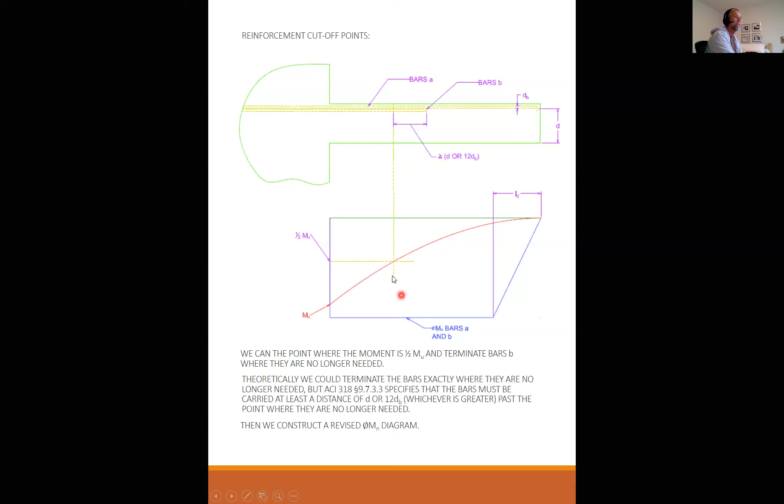So then we're going to carry these bars out a little bit beyond where we need them, and we're going to construct a revised phi-Mn diagram based on cutting half of these bars. And this is what it's going to look like.

So the capacity of just the A bars is right here, because at this point I have my fully developed A and B bars, but I stopped my B bars here. So over here, all I have is my A bars—this is my capacity of just the top row, the A bars. Then we have these slope portions, because it takes a little while to develop the A bars from the end of the A bar, and again it takes a little while to develop the B bars from the end of the B bars.

So this is what my phi-Mn diagram looks like. We construct this in such a way that we can visually look at it and say, okay, I still have more capacity at every given spot than the actual demand, as shown by the red line. If you don't, then you need to adjust where you're cutting your bars down so that you do—you always have to have your capacity greater than your demand at all locations.

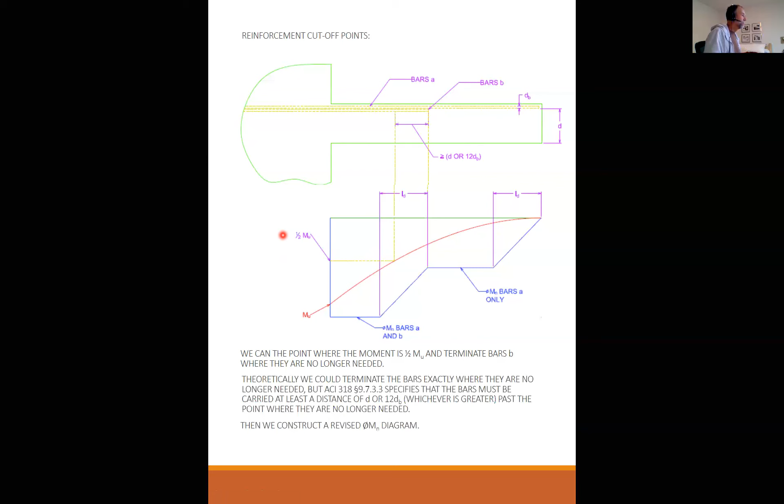By the way, can you see when we give you a thumbs up? Can I bring this over here, can you see that? Can you see the Zoom group chat? No. Okay, never mind, but that's all I can see—I can see who's muted, who's talking, and the Zoom group chat where some folks like to say yes, I'm awake, I'm here, but no, I haven't seen a thumbs up. I don't know about the other students, but in my other classes, myself and my peers give a thumbs up whenever the professor asks if we're following.

So you're not just there with awkward silence, you know. Yeah, that'd be great, I feel like I'm talking to myself. But I don't see any thumbs up, unfortunately. Maybe I'm doing something wrong. But I do see when people Zoom group chat or do the private chat, I see that.

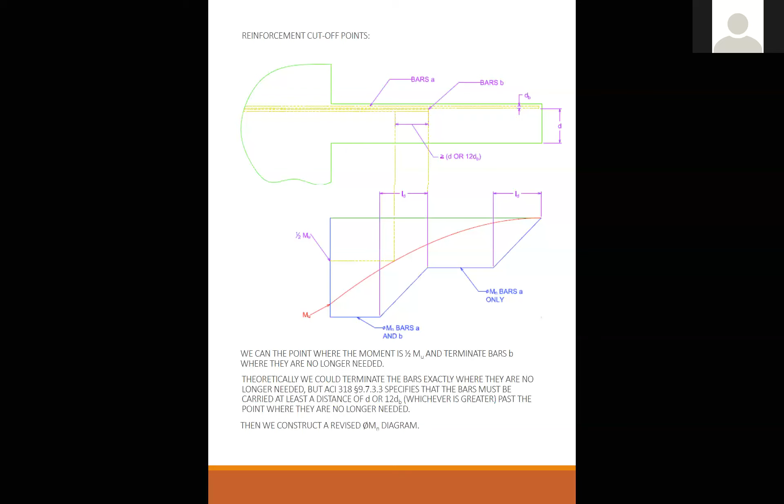The thumbs up is in the pictures. I could see when my classmates are giving thumbs up. Right now I have Edgeman Ting giving a thumbs up. I am not seeing that. Oh, probably because I'm sharing my screen and you guys aren't. So you're seeing, I don't know. Anyway, just from time to time I'll ask an open-ended question. If somebody would just say hi, I'm awake, yeah I'm getting it, then that's all I need I guess. All right, sure.

Okay, so we're not too far from the end here, so we're doing pretty good. We confirmed that the phi-Mn diagram covers the Mu diagram at all locations. Again, this is all upside down because this is negative bending. If this was positive, the red line would be above and the blue line would be above that. If it's negative bending you're below the axis, positive bending you're above the axis, but the whole concept is you build this phi-Mn diagram and then visually confirm that you're always above or below your required moment.

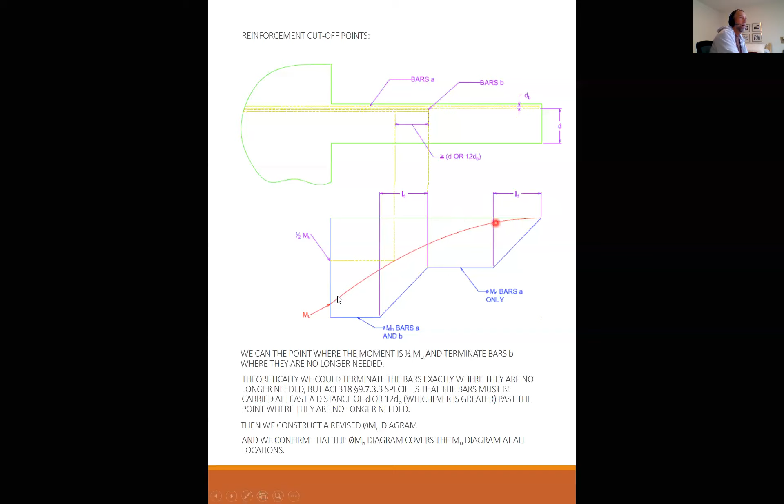ACI 318, section 9.7.3.5 gives further restrictions on the cutoff points for flexural reinforcement, stating that at least one of the following must be satisfied. If you're going to cut off bars, then Vu has to be less than or equal to 2/3 of your phi Vn. There's a complicated behavior between shear and flexure: if the shear is high, it pushes the tensile requirement more towards the support.

So they have this requirement that has to be checked. For number 11 bars and smaller, continuing reinforcement provides double the area required for flexure at the cutoff point, and Vu is less than 3/4 of phi Vn. Or the stirrup or hoop area in excess of that required for shear and torsion is provided along each terminated bar or wire over a distance of 3/4 d from the termination point. Excess stirrup or hoop area shall be at least - and there's some equations. Now that's it, so A, B, or C.

So basically, going back to the example I did, you would want to confirm that your maximum shear, Vu, at the point where we terminated those bars is less than 2/3 of phi Vn. ACI 9.7.3.8 gives further restrictions on bar cutoffs and continuation of rebar at supports and inflection points, which are beyond the scope of this course.

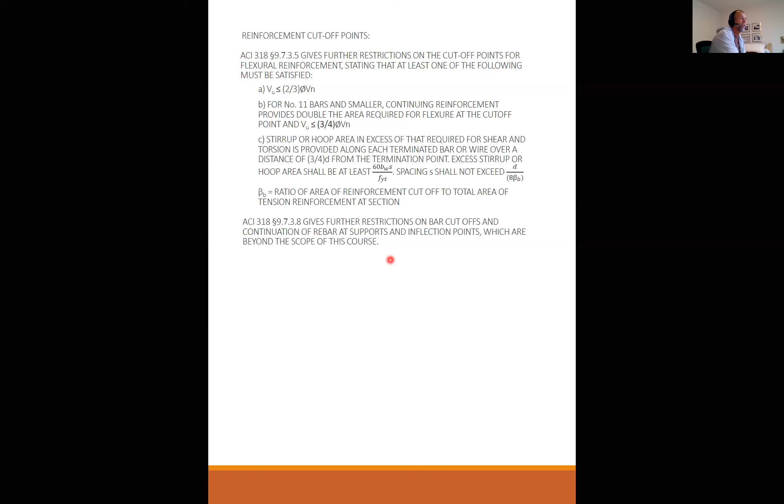Rebar splicing: there are many cases where rebar must be spliced, either because of the staging of construction or maximum available length of the bars. One of the common things we do for concrete garages is have diaphragms - that's the actual concrete floor, but it acts like a beam laying on its side for seismic loading. These diaphragms can be hundreds of feet long. You can't buy rebar that's hundreds of feet long. As far as I know, the maximum length you can get is about 60 to 80 feet or so. So that means you're going to have to splice rebar, or go the other direction.

Everybody's familiar with the tallest building in the world as of today, the Burj Khalifa - I'm sure you've heard of it. This is a reinforced concrete building. The whole building, except for maybe the last couple hundred feet which is a steel spire, is concrete. The main lateral force resisting system of this concrete building are concrete shear walls. At the elevator core, right in the center of the building, these walls are somewhere around 2,700 feet tall. So you can imagine there's a lot of splicing going on, since you can't get rebar more than 60 or 80 feet, and this wall is 2,700 feet tall - there's going to be a lot of splicing.

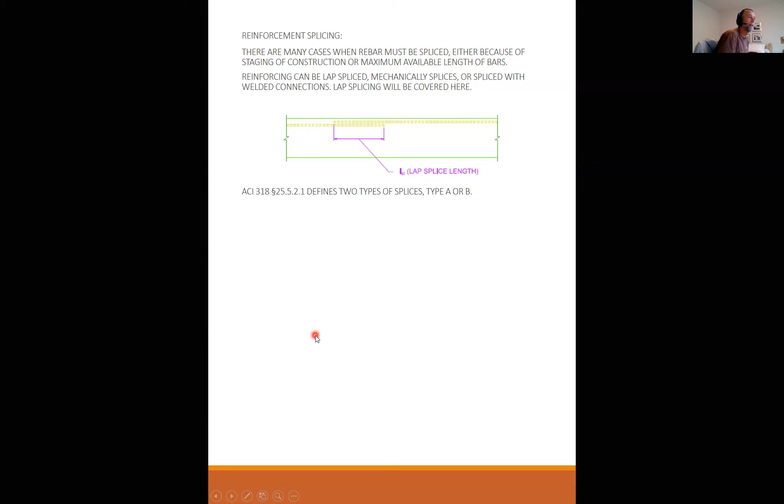ACI 318 25.5.2.1 defines two types of splices, type A or type B. For a splice to qualify as type A, the area provided over the area required must be at least 2 times at the location of the splice, and no more than 50% of the total reinforcement is spliced at one location. So you can see right here, I got 2 times the required rebar because I got 2 bars instead of 1. But if you're splicing multiple locations, you just have to be sure that you always have at least twice the steel required within this lap splice region.

And the other requirement is you can't splice more than half of your total steel in any one location. So if you need to splice a whole bunch of bars, you do some of them here, then you move over and do some of them here, then you move over and do some of them here. You have to stagger how you're splicing that rebar.

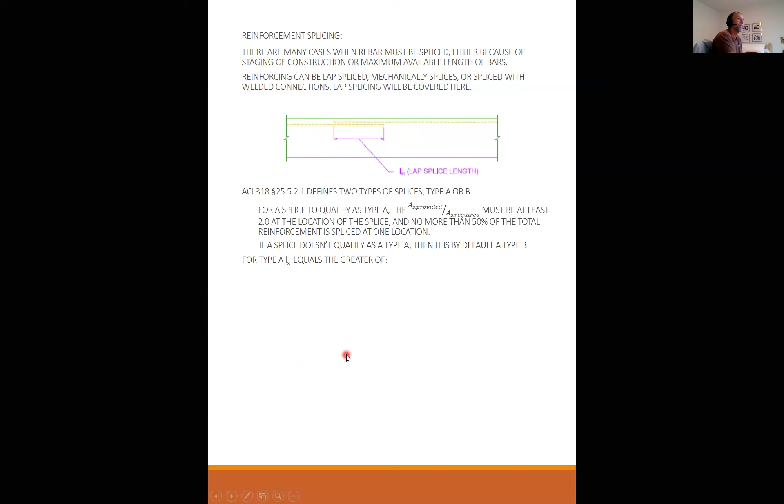If the splice doesn't qualify as type A, then by default it is a type B. For type A, LST, which is the lap length, equals the greater of 1 times LD, or 12 inches. For a type B splice, LST equals the greater of 1.3 times LD, or 12 inches.

Did I have a question?

A type A splice is more stringent, but if you have met the requirements of a type A, you get a little bit better outcome. You only have 1 times the development length of the rebar. If not, then you have 130%, 1.3 times the development length of that rebar.

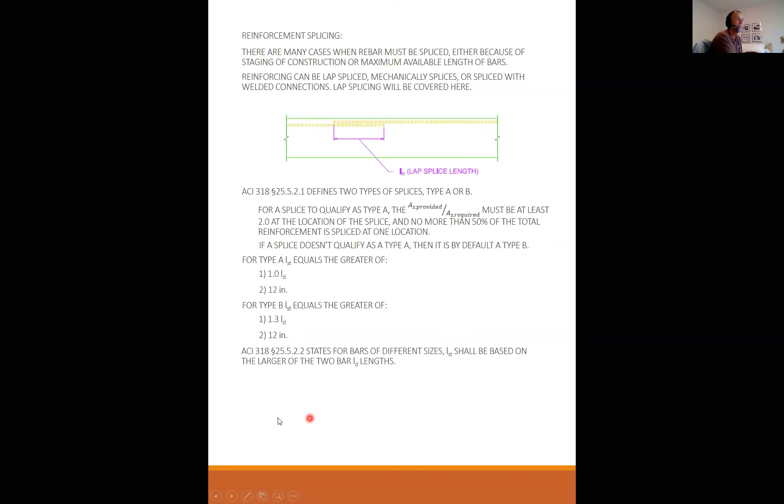And ACI 318 25.5.2.2 states for bars of different sizes, LST shall be based on the larger of the 2 bars' LD lengths. So in other words, if you're splicing number 11s to number 9s, then you would base this LST on the development length of number 11s.

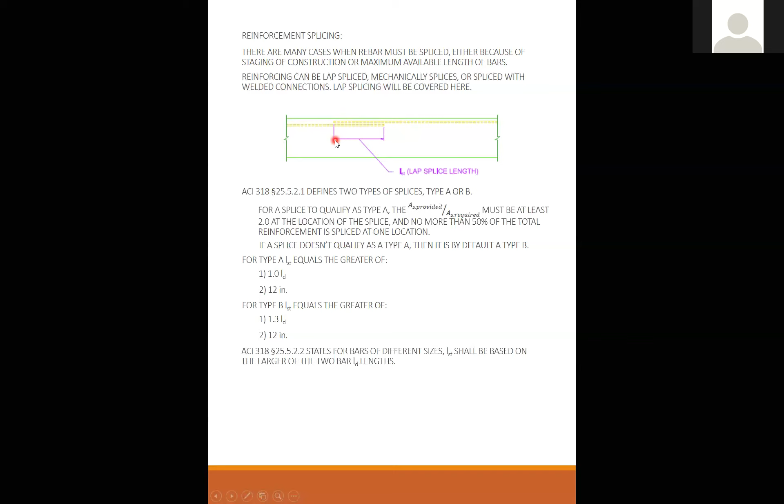Okay, so that is today's presentation on rebar development. Any questions at all? Professor, I had a quick question.

Sure. So whenever you're splicing, don't you get like the diameter of it going on top? Wouldn't that go into the clear cover that you have to maintain clearance for? How do you manage doing the clearance? So your D changes, everything changes in that moment, doesn't it? Not necessarily, but that's a great question.

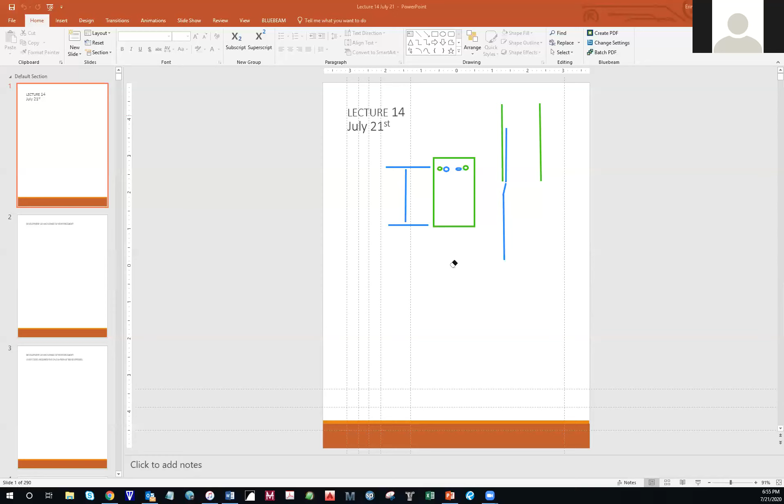Yeah, professor. I noticed that we've been working on beam design, column design, and I've noticed that we haven't focused on connections at all, and I think it might be outside the scope of this class. But where would we learn how to connect something like a concrete column to a slab?

That is a very good question. Unfortunately, it actually is outside the scope of this class a little bit. Basically, all of us who have ever taught concrete have the same problem, and that is, what do I teach and what don't I teach? Because I could teach this class eight semesters in a row and still not run out of material.

It's kind of like, I don't know, teaching law. How much do you learn in law school, and then how much do you learn in the field? Or, not to compare concrete design with surgery, but how much can you actually be taught in one semester? So we tend to leave that out.

You're absolutely right. But generally what happens in connections is you either have cast-in-place connections or precast connections. Precast connections - this is one piece of concrete, this is a different piece of concrete, and they come out on trucks, and there has to be some way to support one from the other. So we cast in these corbels, or we'll weld them, or there's all kinds of different ways to connect them.

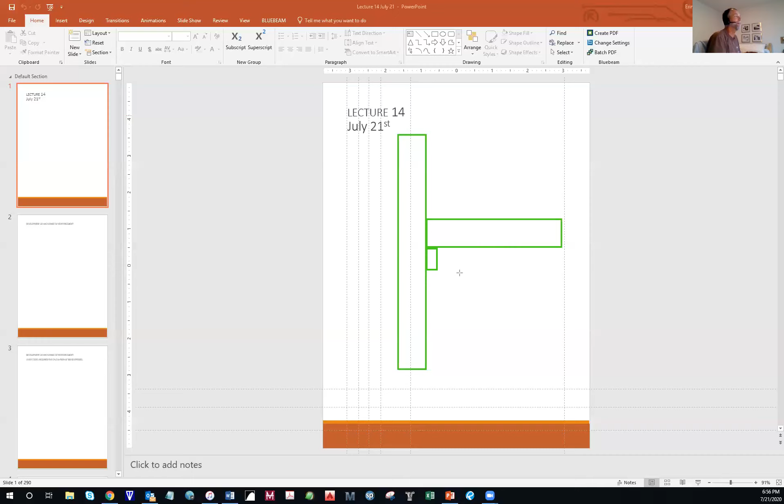And there's a reference book, if you ever get a chance to look at it, it's really interesting. It's called the PCI Design Handbook, and it has a zillion billion different ways to connect precast concrete to each other. But that's only for precast.

Cast-in-place concrete is not really connected together as much as it is just cast together. So in cast-in-place concrete, your rebar would just extend from your beam into your column, and then you would have some hooks on it like so that develops these bars within the column.

And likewise, where the column meets the footing, you would have rebar that goes across this interface between the column and the footing. And if you had to have - which you will have to have - a cold pour, then you have so much rebar that comes up out of the column like this. If you ever go to a job site, you'll see the column partially poured up and there's rebar sticking out.

And then what they'll do is they'll come in with the next pour and they'll tie this rebar close to it, and then they'll splice it kind of like this, but the splices will bevel in like this.